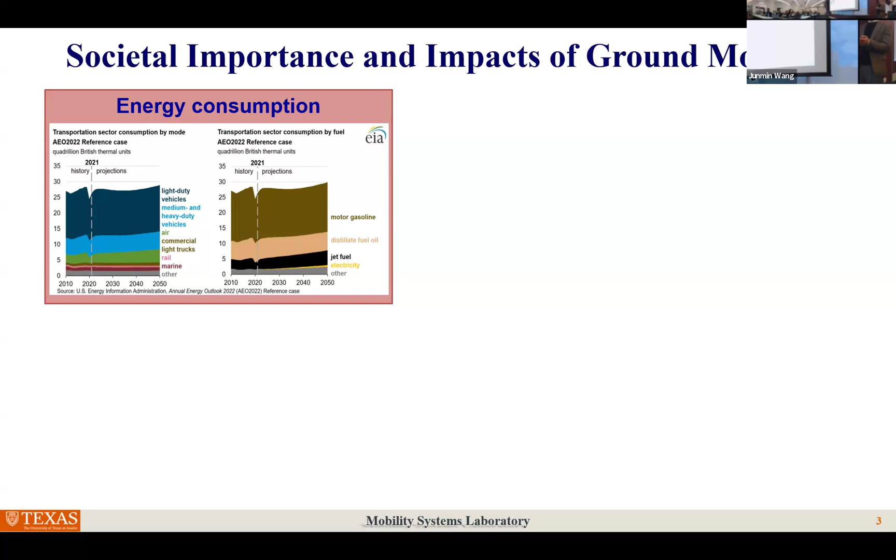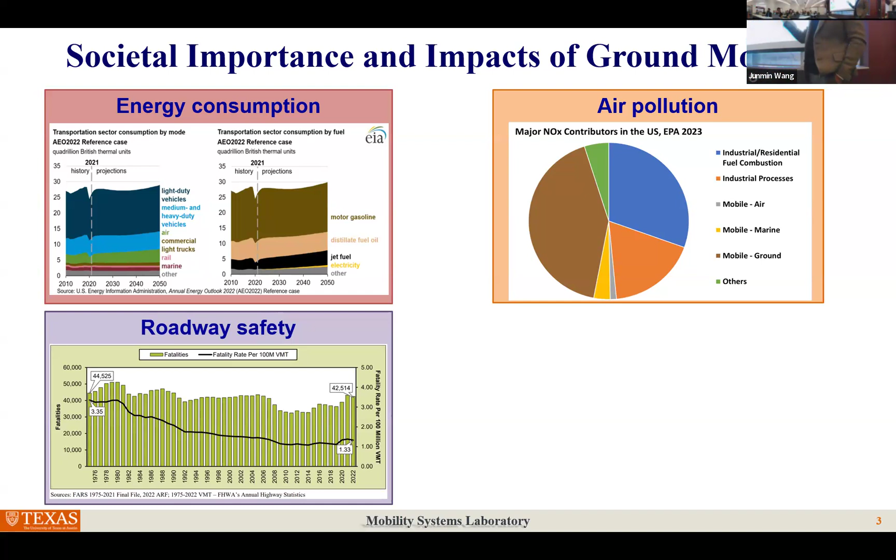But largely, the negative slope of this curve is due to technology advancements. So seat belt, ABS, airbag, EPS, AEB, or ADAS, the lane keeping system, all those are contributing to the decrease of this curve.

Looking into the future, we are in a smart age. So we have smart cities, smart living. People can do many things remotely. During the COVID years, we had remote learning, remote shopping, remote healthcare, etc. It seems like we could do everything online, everything remote. However, one thing we cannot do remotely is we need somebody and something to transport goods or people from point A to point B. That is our ground mobility.

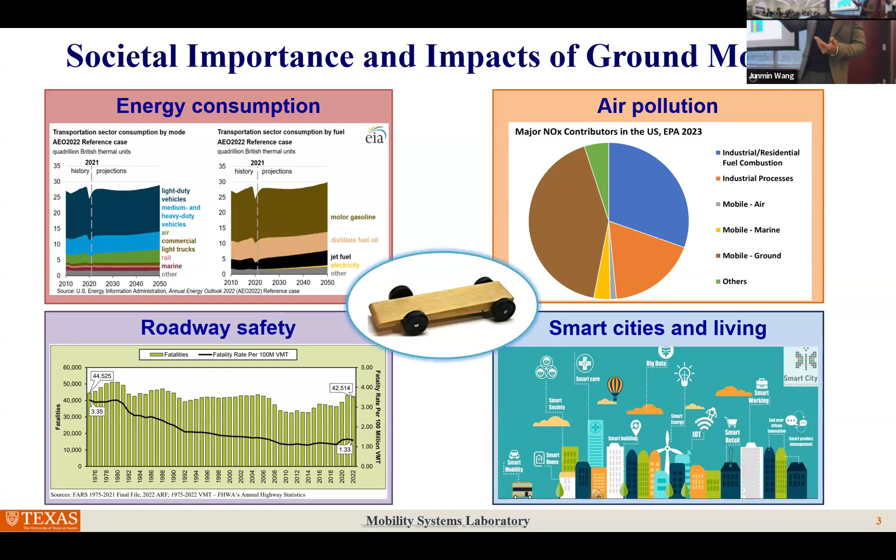So in these four important aspects of our society, ground mobility, ground vehicles play a very critical role. So I always say that any improvement here will have a very big impact on our society because the volume is very high. A 3% increase, 5% increase, multiplied by a huge number of vehicles, will have a very substantial impact on our society from the energy, environmental, and even safety perspective.

So the background here is the technology advance. One is the increasing level of automation. SAE has this roadmap to characterize vehicle automation into these 5 levels, or actually 6. Essentially level 0 is nothing being automated, everything is done by the human driver, all the way to level 5, meaning the human will be doing nothing, everything is done by the machine. In between them, we have different levels of automation.

Increasing level of automation. So right now on the market, perhaps we are somewhere here in the middle. Many of you, if you recently bought a car, probably have level 2. You have the lane keeping system and adaptive cruise control. Those two together are considered level 2 automation.

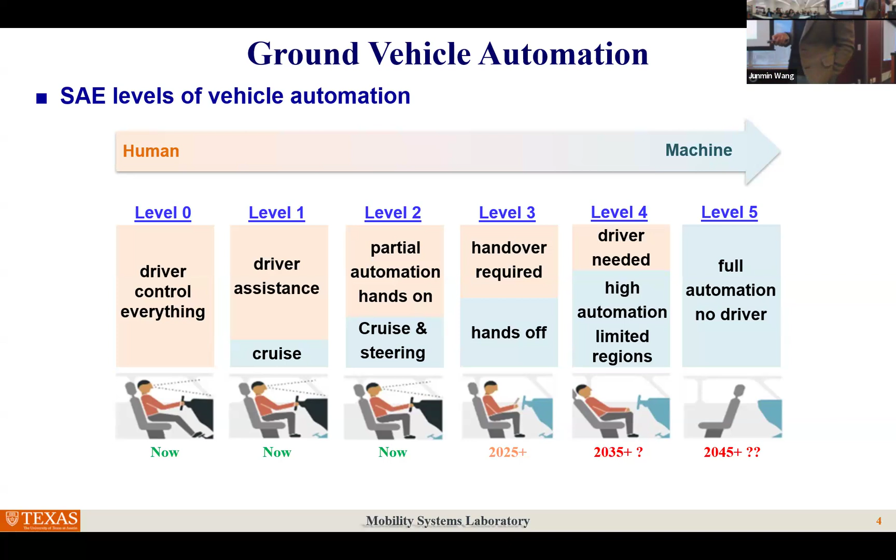Another is communication. With wireless technology being advanced so much, we can almost exchange information between the vehicle and almost everything else: to the human, to other vehicles, to the cloud, to infrastructure. So essentially, this brings us to a new era in which we have unprecedented information richness and new degrees of freedom due to automation.

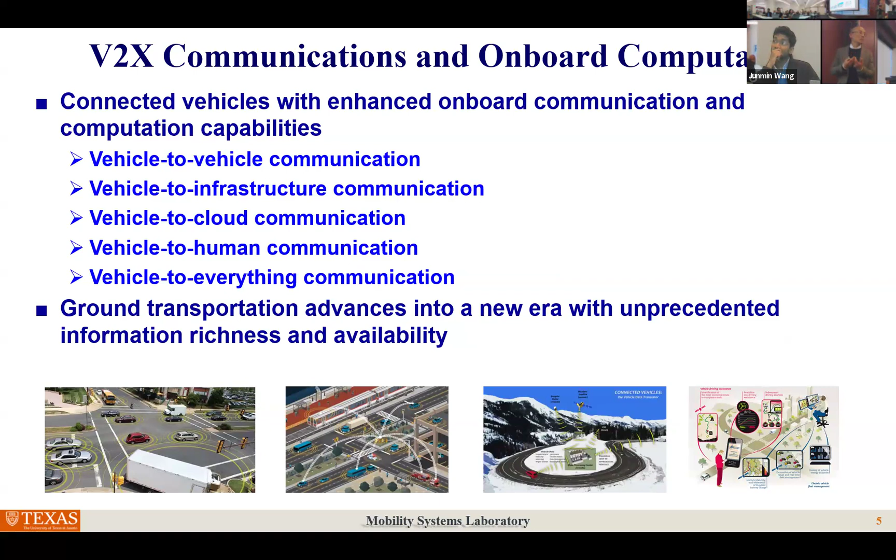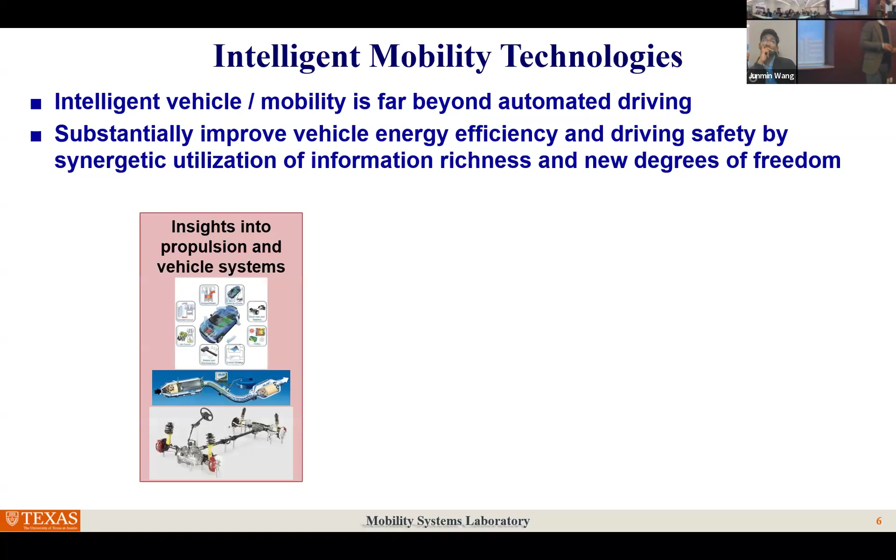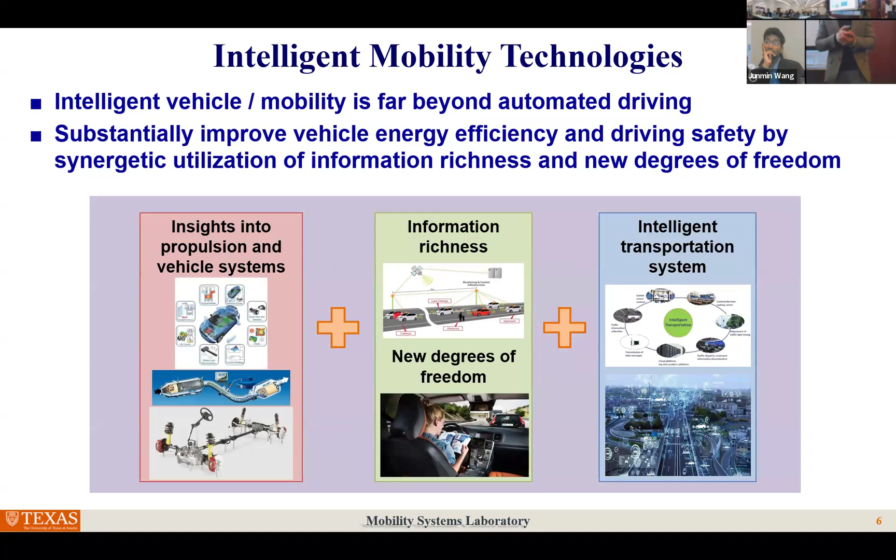So we are looking beyond just automated driving. What we are interested in is how we can substantially improve, for example, vehicle energy efficiency, driving safety, human trust, and human acceptance by leveraging that information richness and the automation functions. We want to leverage our deep understanding of these physical systems, plus the availability of information and the new degrees of freedom, and our infrastructure, to create synergies that can positively impact our society in terms of energy, living environment, and safety.

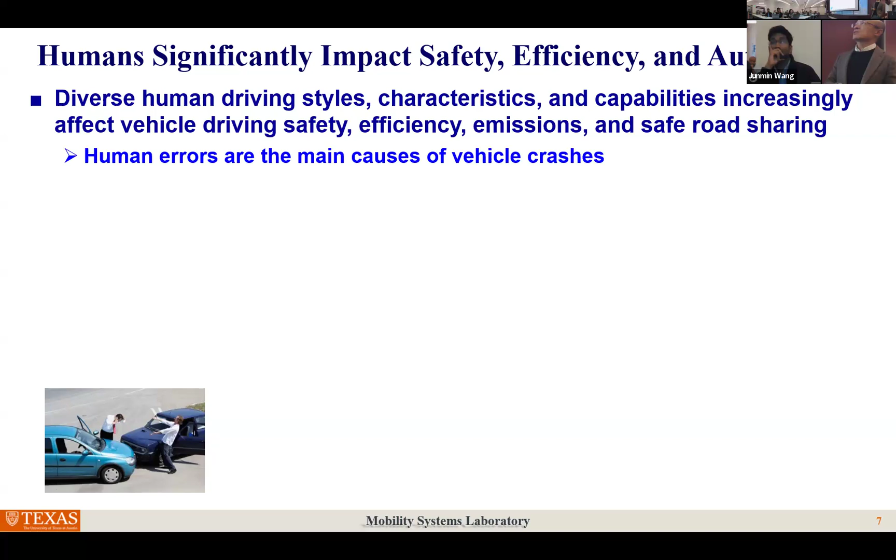In this background, even though we have increasing automation, humans are becoming more and more significant in terms of vehicle safety, efficiency, and automation, including human driver style variation, human characteristic changes, and human capability differences. For instance, more than 90% of crashes on the road are caused by human errors in modern society. Different human driving styles can cause up to 40% efficiency difference and up to 40% tailpipe emission differences. Everything else is the same; just change to a different driver, and we can have up to 40% variation, which is huge.

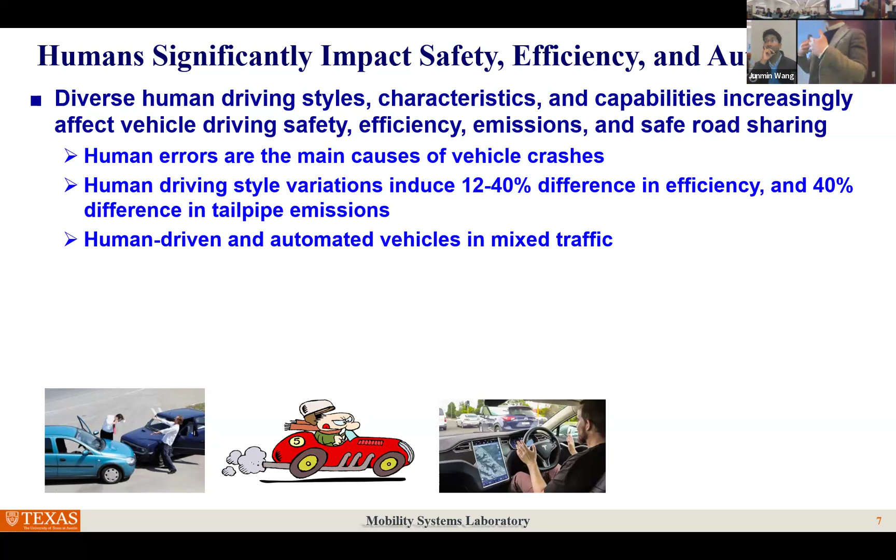And we already have human-driven and automated vehicles sharing the road together in mixed traffic. Another aspect is human trust in and acceptance of automation, which is becoming more and more critical to address. Looking into the future, perhaps we will not have driverless cars. We're going to have human drivers, machine drivers, or a combination: human/machine drivers.

In this context, there are several aspects. One is a survey conducted by the Institution of Insurance Companies several years ago. They surveyed 1,000 new cars bought by different customers. After using the cars for about three months or maybe half a year, you typically return your car to the dealer for its first service. They checked whether the automation functions were enabled or disabled at that first return. Guess the result? More than 50% of those functions were disabled purposely by their human users.

That means our engineers design all these fancy automation functions, but in reality, they are not that accepted by human users. When they are not using them, all these benefits we engineers designed amount to nothing, zero, no impact. That's one thing.

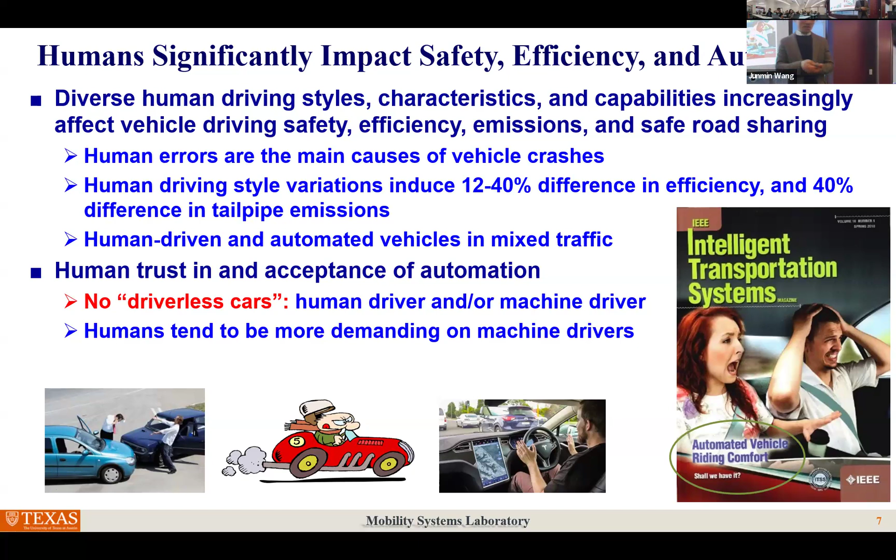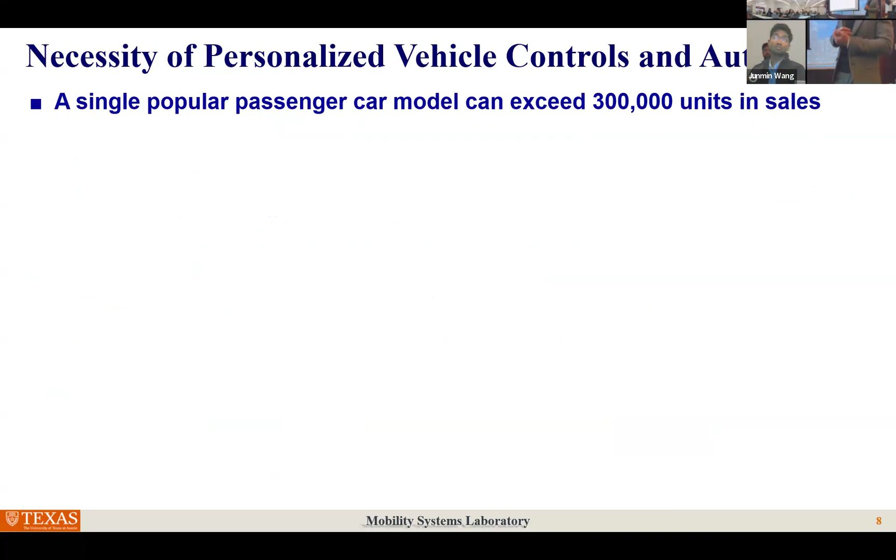So why is this necessary? If you look at data, a single popular passenger car, like some of the Toyota models, can reach 300,000 units in sales, which means we have over 300,000 different humans operating the same physical system all over the world, right? Different locations, different weather, different climate conditions, and different human habits. Obviously, this is a suboptimal combination.

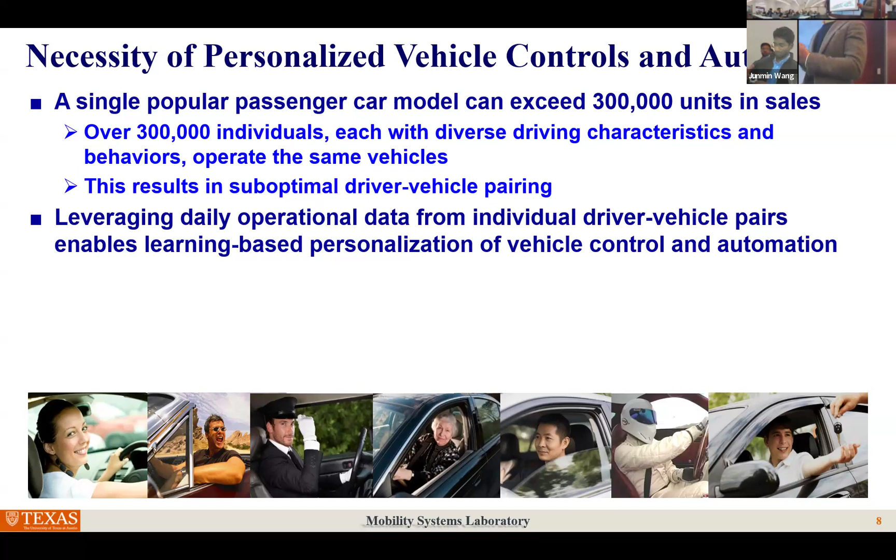So if we can leverage our daily operational data from these individual driver-vehicle pairs, learn from this usage, try to study the human user individually, and then do this personalization of the control, we might gain some benefits: benefits in terms of efficiency, safety, and also increasing the trust of human users in this automation. So those are all possible.

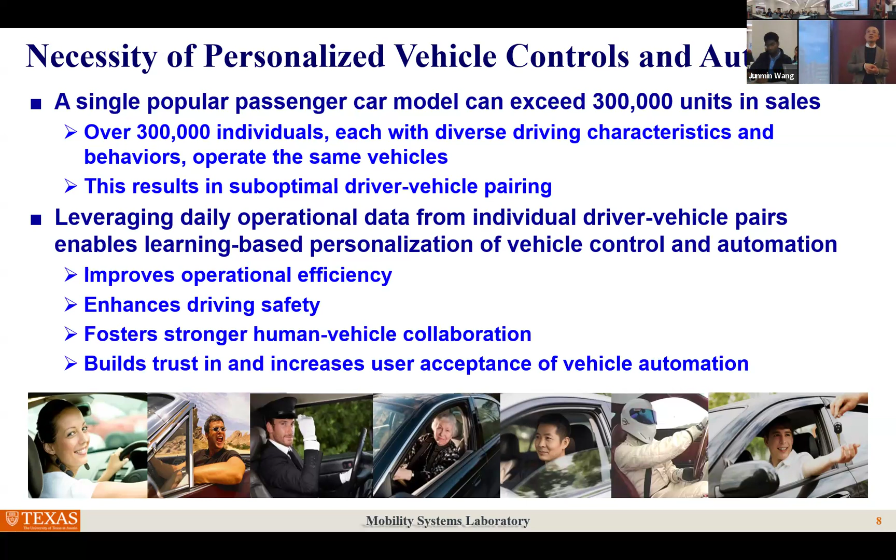However, we have to do this by learning from individual users. The OEMs like Toyota cannot do this because they don't know who is going to buy this car, where this car is going to be used and how it is being used. We can only do this during the usage: learning and then adapting.

So how do we do this? The central piece here is the modeling and prediction of individual humans. Using the historical daily data, we try to characterize the human's preferences, skills, characteristics, also emergency behavior, driving style, frequent routes, and all those things.

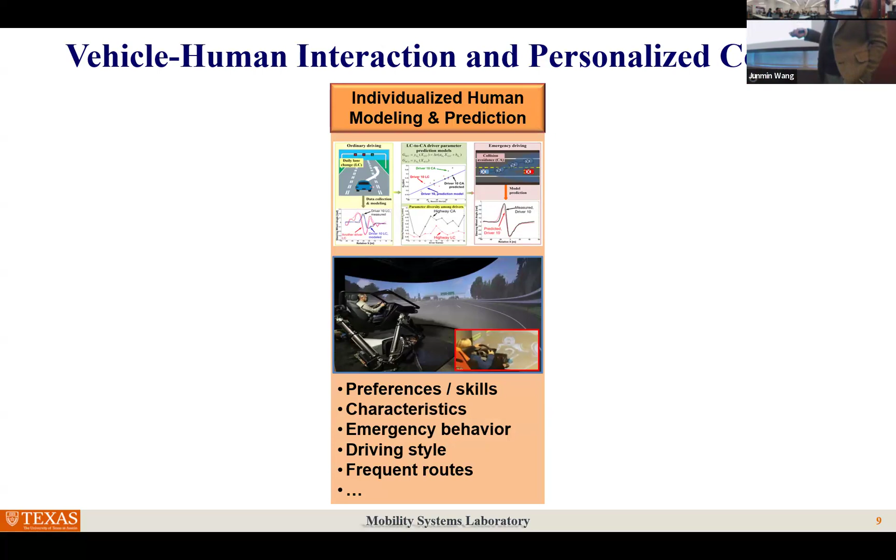On one side, we can leverage this knowledge to personalize, for example, motion control. How do we accelerate? How do we steer? How do we maneuver? To increase human trust and acceptance, thereby increasing driving safety. On another side, we could leverage this information to predict and enhance the optimal control of the propulsion system to increase energy efficiency and reduce tailpipe emissions, again creating synergy among these three pillars.

In recent years, my lab has invested a lot of resources to develop this integrated human-vehicle-automation simulation platform. The centerpiece is a real-time simulator. We have this very high-end immersive driving simulator where a human subject can be on the motion base, in a virtual reality environment. We can also simultaneously measure human brain activity, muscle activity, and cognitive activity like gaze motion and eye tracking.

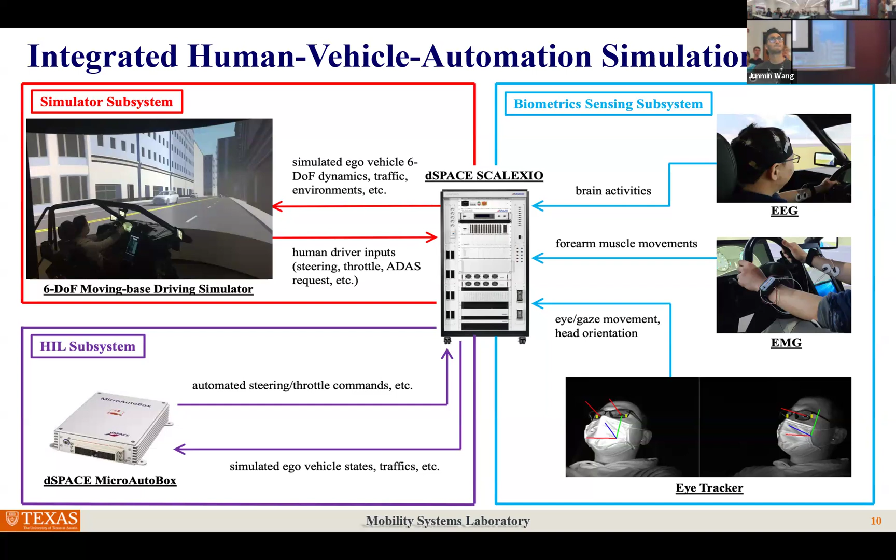We can also implement various controller algorithms. All of this can be integrated so we can learn, adapt, and evaluate. So this is a whole loop. I'll show you two more example videos. One is we can also simulate automated driving. In this case, we don't have a human driver. We can program it to automatically steer and deal with other traffic participants. For example, there is a stop sign coming here. It will recognize the stop, then make a left turn.

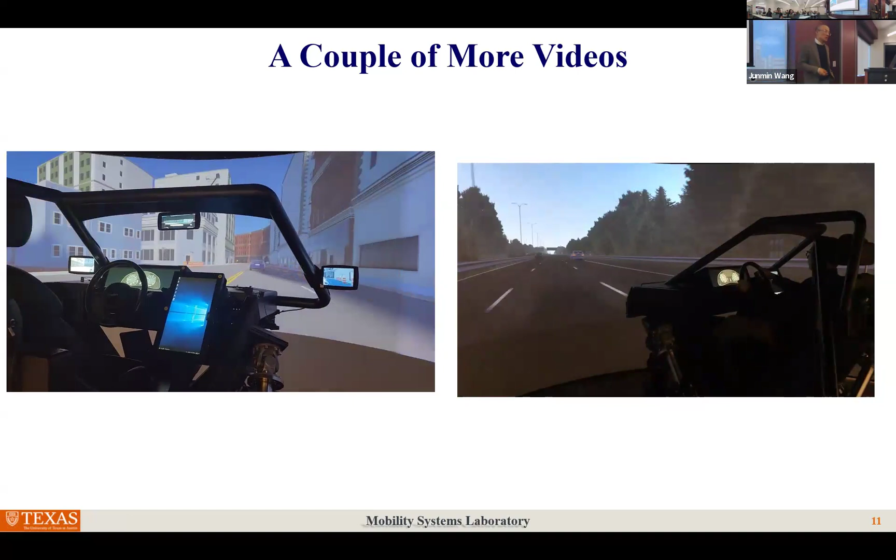We can also simulate different weather conditions. I don't know if people on Zoom can see this, but you can closely see the raindrops. We can simulate raindrops and other vehicles, which makes it a really powerful system to put the human into a movie-theater-like setup that is very immersive to study human and automation.

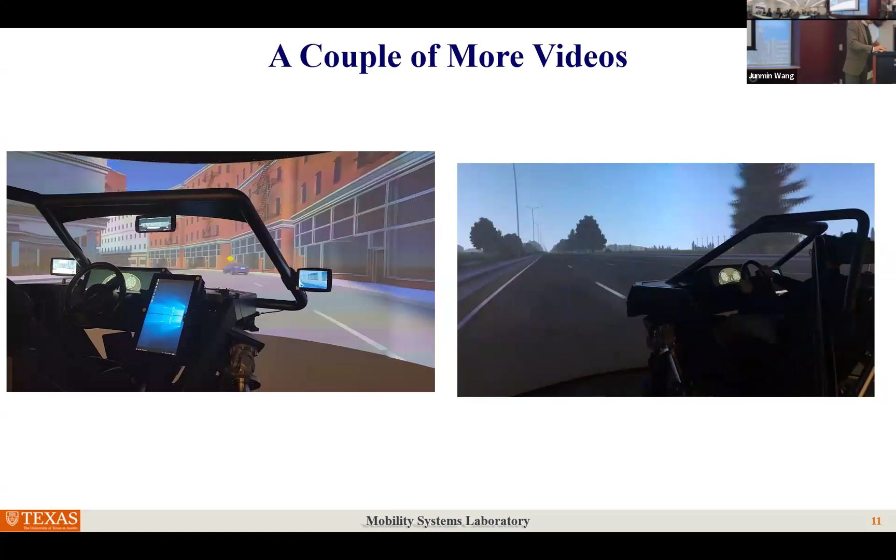Okay, now let's get into several examples. First is how we do personalized propulsion control. One example is a hybrid electric propulsion system. It has an internal combustion engine, and in parallel, an electric drive with motor and battery. Together, we want to minimize energy consumption and also minimize tailpipe emissions.

Optimal control. So with connectivity and camera, LiDAR, and radar sensors, we can have future traffic and road information available from those perception systems. Even though the system is stochastic, we can still detect them. However, between this traffic and road information and the future reference signals of the propulsion system, which are the future torque and speed demand, there is an uncertain element, which is the human driver.

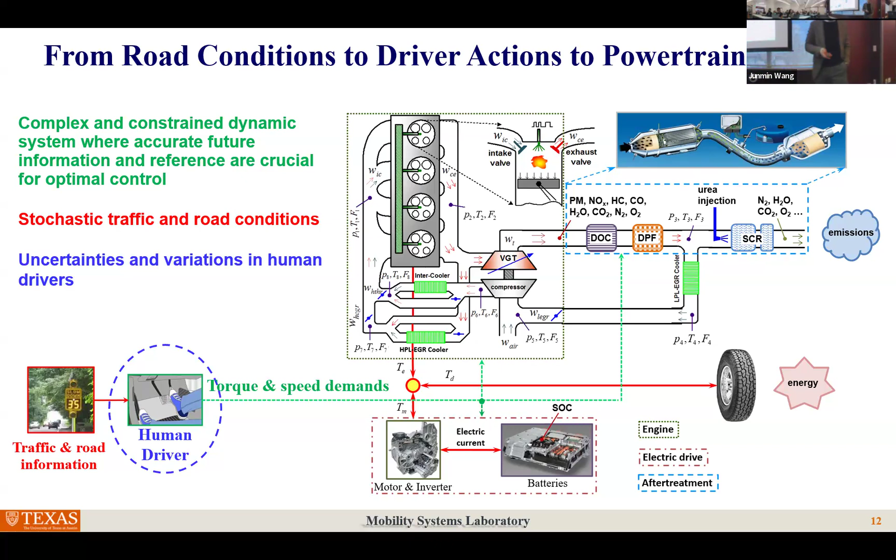Everything else is the same road, same traffic, but different humans will translate this information to different torque speed demands. And this piece is very uncertain. Unless we can have a good way to deal with this uncertainty, it's very hard to achieve optimal control in real world operation. So how do we address this?

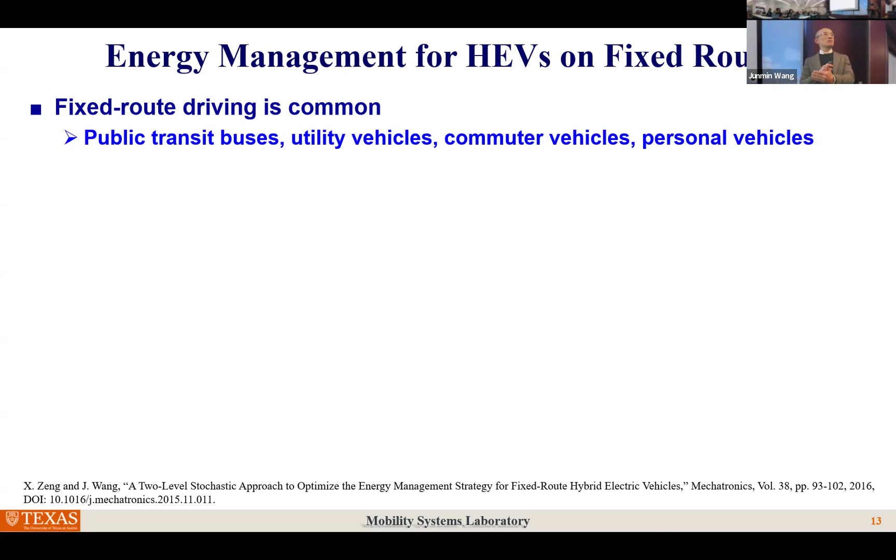Let's first look at this example. Essentially, this is a HEV energy management system on fixed route driving. So what is fixed route? Fixed route driving is actually very common. For example, our public buses, utility vehicles like garbage collection trucks, commuter vehicles, even our personal cars often drive on a fixed route. If you think about driving from your apartment or home to school, most of the time it goes through the same route. That's called a fixed route.

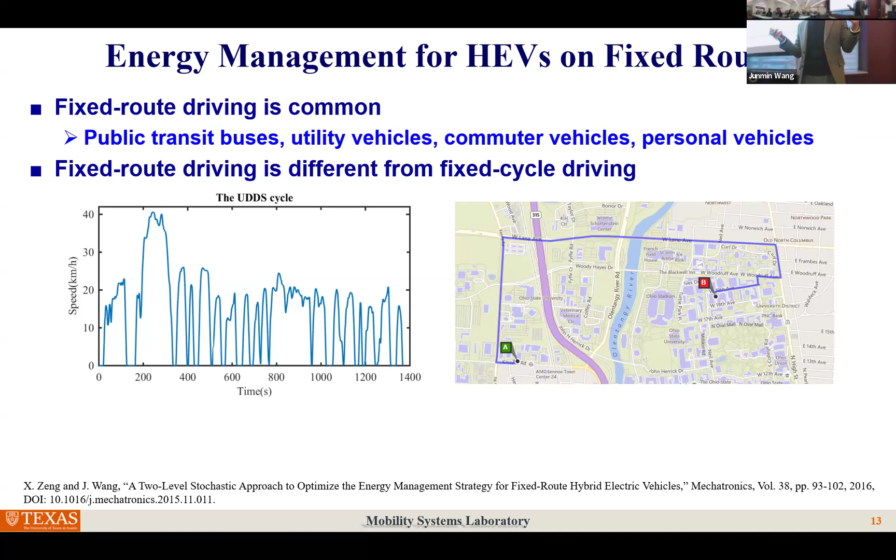So even though the route is fixed, it is different from the so-called fixed cycle driving. Fixed cycle means the vehicle speed is a predefined function of time, used for standard testing of vehicle efficiency, emissions, etc. Fixed route means you start from point A to point B, going through the same route, but every trip is different because every trip has different traffic, different weather, different vehicle condition, or different human mood. So this is completely a stochastic process, even though the route is fixed.

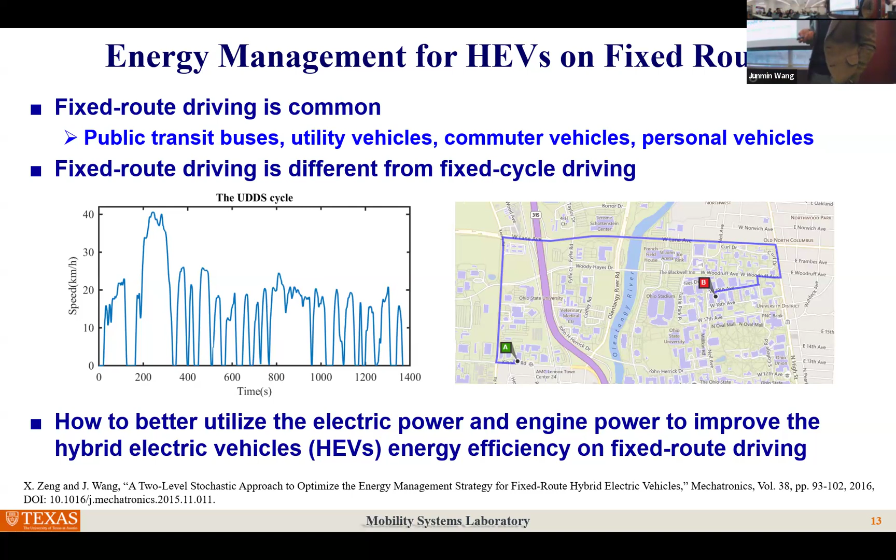So that's the nature of it. So how can we better utilize the electric power and engine power to improve the energy efficiency of this HEV on fixed route driving? That's a problem we addressed several years ago.

So we started with a typical fixed route, like a 12-kilometer route, which had 8 kilometers of local driving, 3.5 kilometers of highway, some uphill, some downhills, left turns, right turns, stop signs, and also traffic lights. Graphically, something like this. It's a little bit representative of a typical home-to-work kind of route.

So we did 24 trips with a human driver. And if we look at the overall average of these 24 trips, we found the average travel time is about less than 14 minutes. Average speed on local roads is 15, average speed on highway was 96. And the average number of stops was 14.7 because we have traffic lights—sometimes green, sometimes red. So if we only look at average data, it doesn't tell us much information.

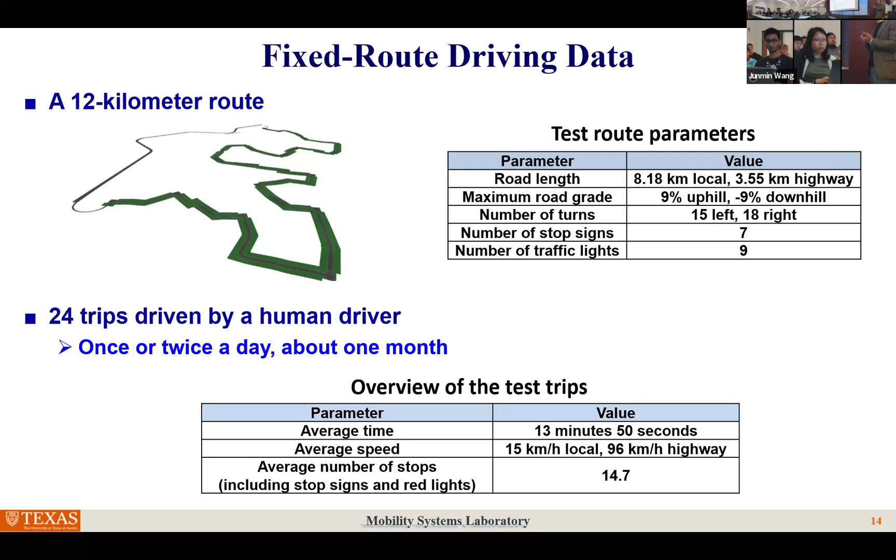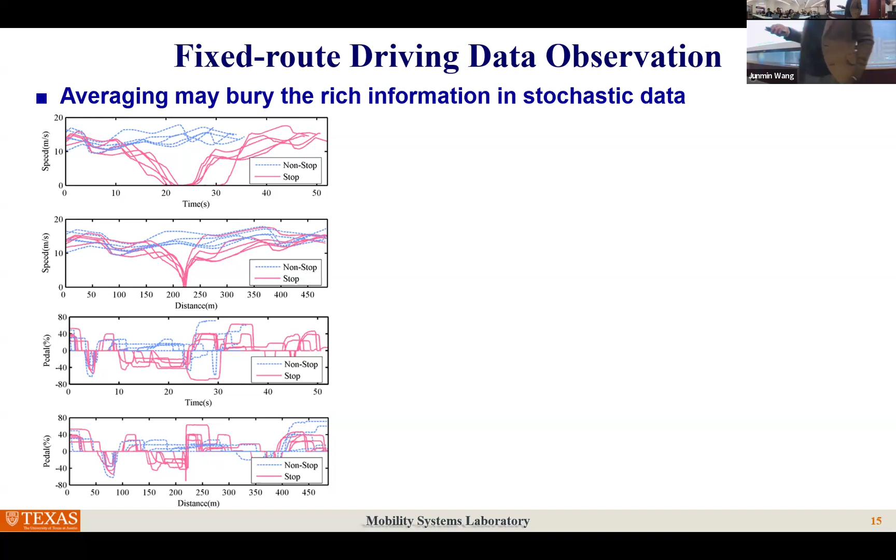But the duration of stopping is different—time to time, it depends on which phase of the traffic light you get. Here is the pedal position, shown for the stop in both the time domain and the distance domain. One thing here we noted was inspiring: when we put the data in the time domain, it was less informative. When we put the data in the distance domain, it was a little bit more informative. So that was kind of inspiring.

Then we also compared these two groups, the stopping and non-stopping group. We found a very different kind of data set in the regenerative braking energy. Because this is an HEV, it has an electric motor—when you brake, the motor can switch to a generator, converting kinetic energy back to electricity. So we can obviously see this stopping group had much higher regenerative braking energy being generated or captured compared with the blue group.

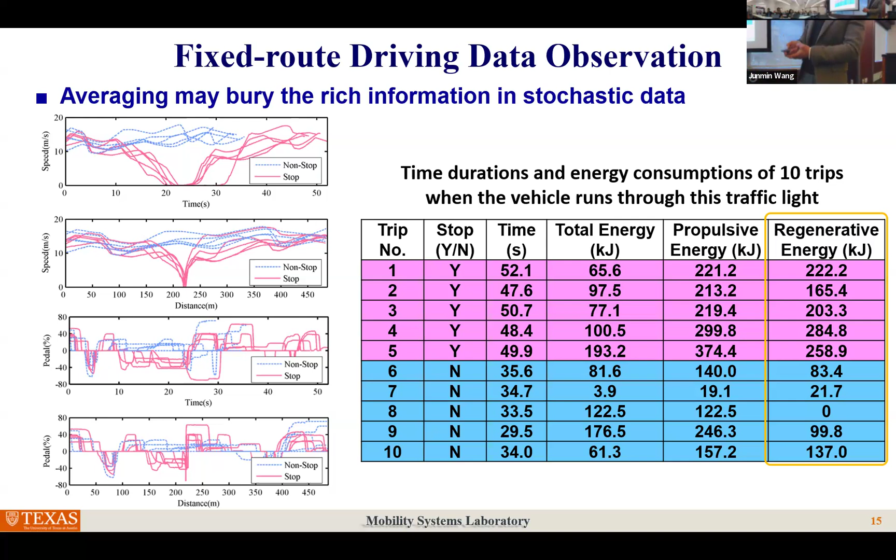So that is kind of inspiring, saying, okay, this might be something useful that we could leverage to increase the operational energy efficiency. So we use that inspiration.

We divided this fixed route into smaller segments by using deterministic road and traffic features. We know where the traffic light was located, but meanwhile we also know the location of stop signs, sharp turns, uphill sections, and speed limit changes. Even though this entire trip is stochastic, along it we have some deterministic information. If we use those, we might be able to improve our speed and power prediction and increase the efficiency of learning from the driving data, and ultimately help us predict the human's behavior. Then subsequently, we can do a better job in terms of energy management.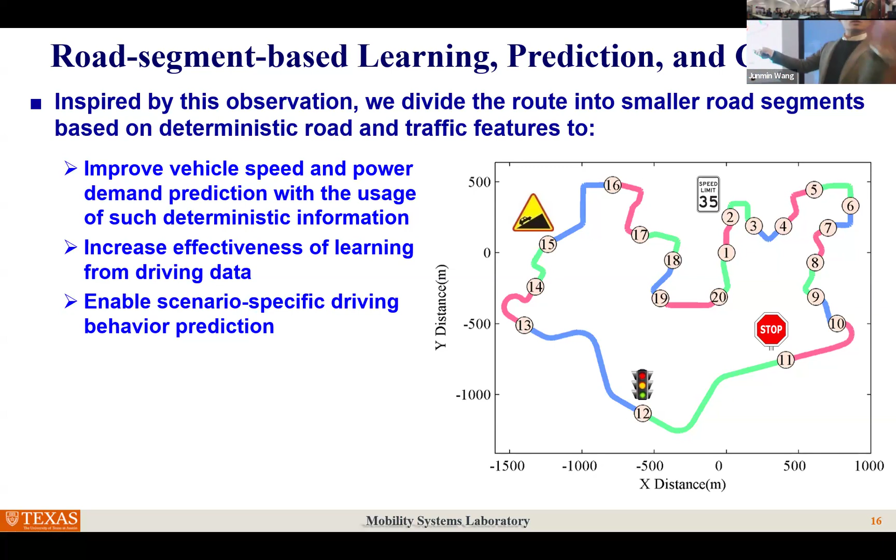So that's what we did. We essentially use these deterministic features to divide one given route into smaller segments. Then within each of these segments, we do the learning and do the optimization. This is helpful - for example, this is stop sign number 11. Depending on direction of travel, if we're going this way, we know the vehicle speed most likely going to be 0 around this location, which is very helpful for the prediction. Same here - we know this is going to be a sharp turn, and the vehicle most likely will reduce its speed, otherwise it will get out of the track.

So essentially, we separate this energy management system into two portions. One is offline learning and optimization, and the second is online real-time implementation. I'm going to explain a little bit on both sides. Using the historical data, we can collect every trip, put them in the cloud, then do this offline optimization, producing the learning-based optimization result to inform the online controller how to do power management when we come to each of these road segments.

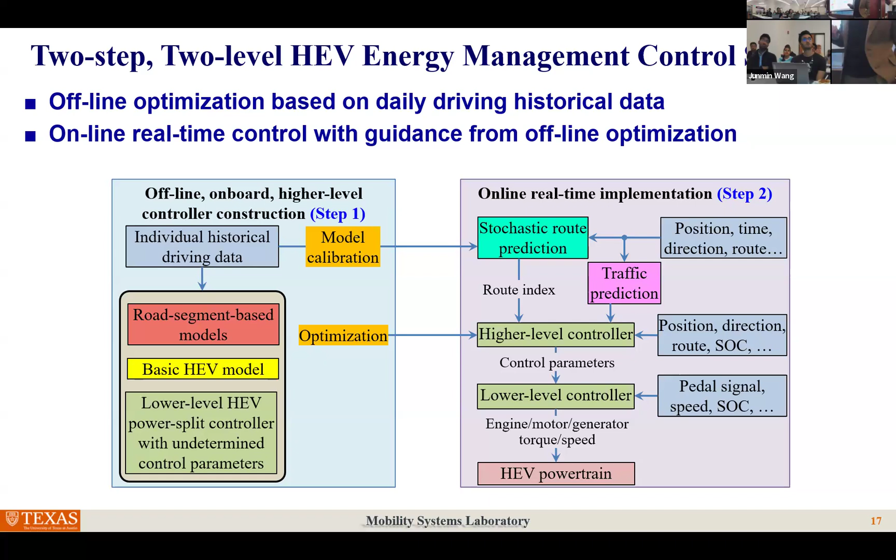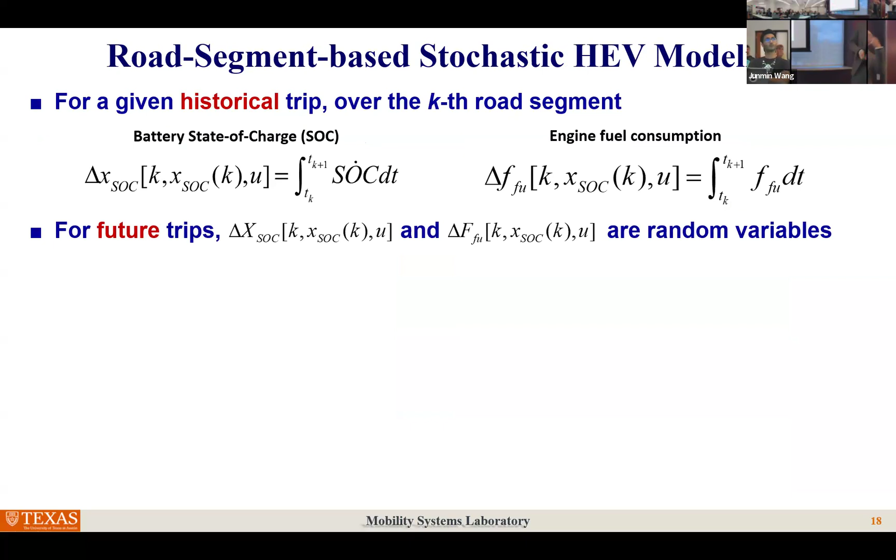So we created this road segment-based stochastic model. Essentially, for any road segment from the previous historical trip, we consider two variables: the battery state of charge change and the engine fuel consumption. For all future trips, we consider these two as random variables. As we accumulate sufficient trips on this fixed route by this vehicle and this driver, we can create their occurrence frequency, then come up with a probability distribution of these two variables. Then we can have the stochastic model in terms of energy consumption.

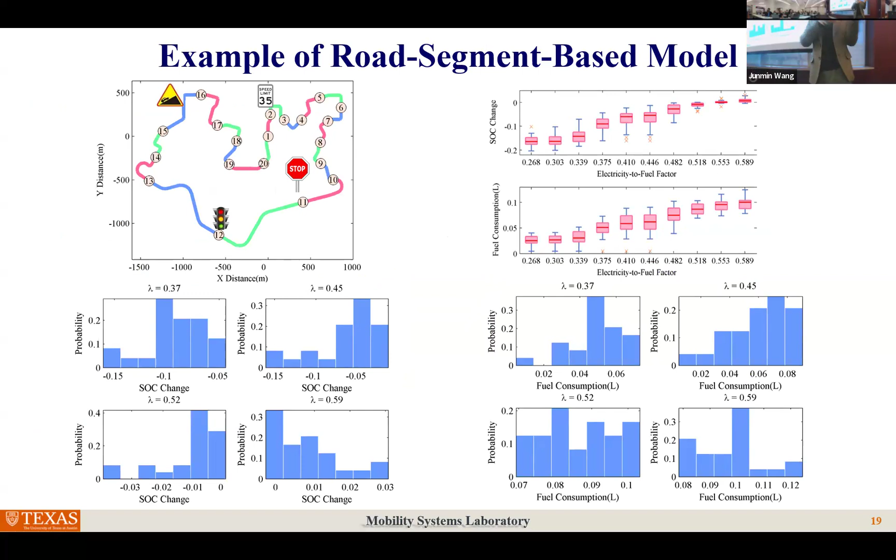All this can be done offline. So this is an example - some of the energy consumption characteristics with different lambda. Lambda here is the control parameter, deciding the variable between 0 and 1. It decides how much we should use the engine versus how much we should use the electric drive. So essentially it's a power split ratio.

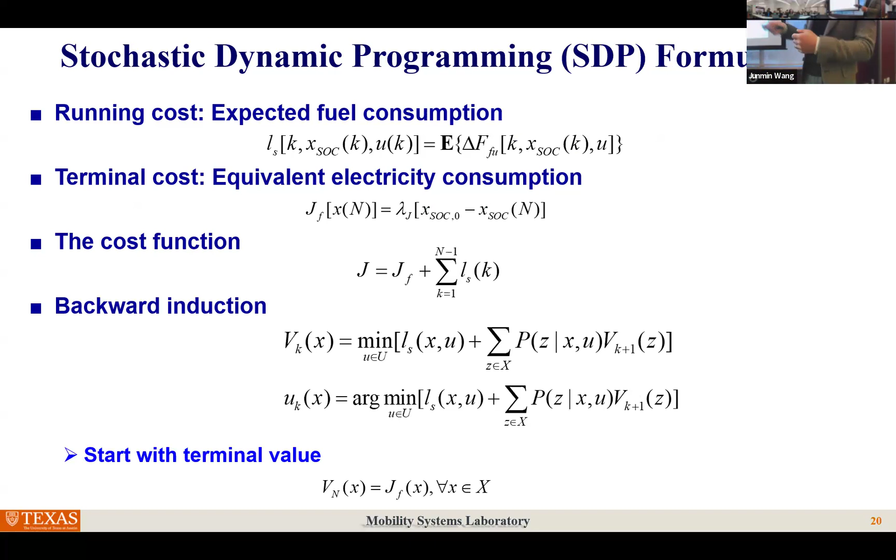So we use stochastic dynamic programming offline - running cost, terminal cost, then we do the backward induction, and we can come up with this optimal control policy. At the end, this offline learning and optimization result can be summarized as a three-dimensional map.

So this three-dimensional map, as exemplified here on this plot, has two inputs. One is the segment index - which road segment we are about to enter. The second input is, at this moment, what is the state of charge of the battery. From these two, we come up with the output, which is lambda, the power split ratio for the HEV to use.

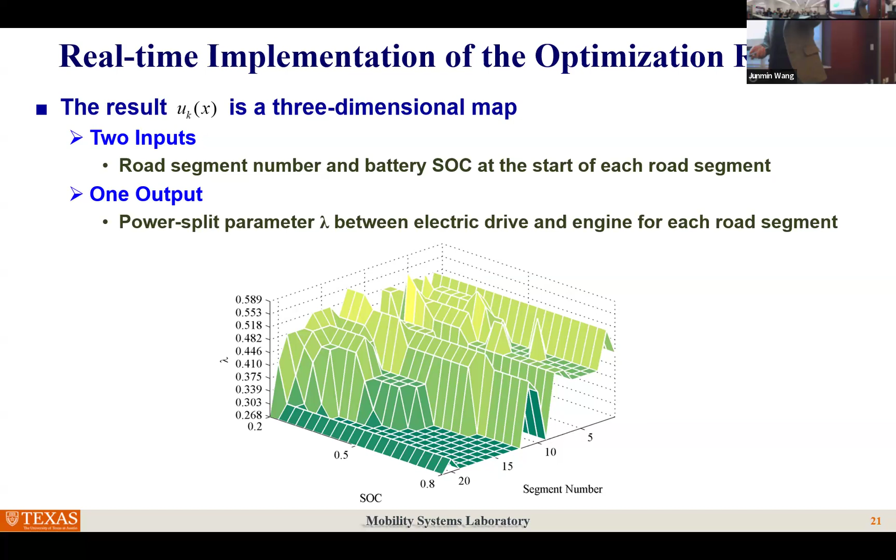So you can see, even though the learning and optimization is pretty lengthy, the end result can be summarized as a three-dimensional table or map stored in the memory of the car - memory is nothing, it's onboard. Then we can use it in real time - no computation, just table lookup.

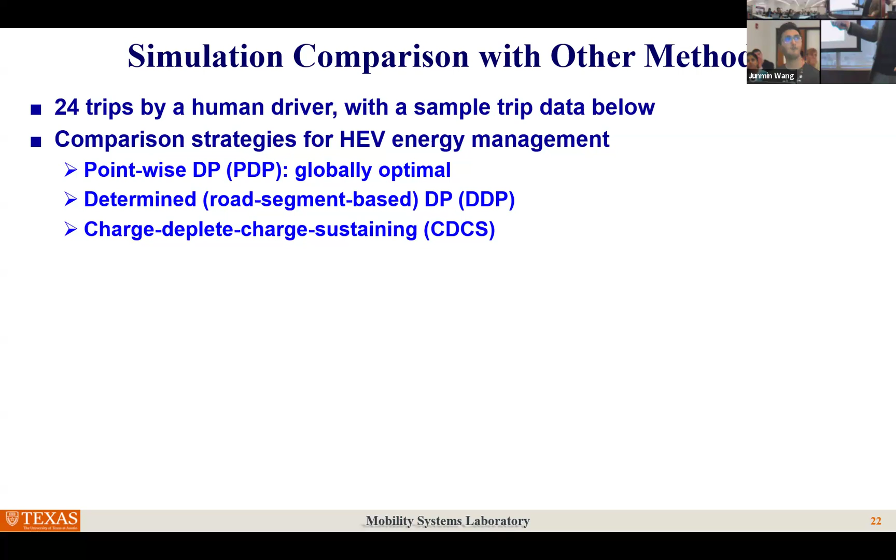So we compared this with three other methods. One is point-wise DP - that means we do this backward induction calculation after we finish, every meter going back to see what would be the best possibility. Obviously this is not causal, this cannot be implemented, but it's a benchmark. The second approach is segment-based DP - that means we don't do point-wise, but segment-wise. The third is this rule-based charge-depleting, charge-sustaining strategy.

Compared with CDCS, which is a real-time implementable EMS, energy management strategy, we can reduce energy consumption by 7%. No hardware change, just software. And as we mentioned at the beginning, this 7% energy consumption reduction is huge.

Because it's a stochastic process, we cannot guarantee every trip gives you 7%, but over a month or two, the average expected value is about 7%, without affecting any driver's preference, their demands for speed, or their pleasure of driving.

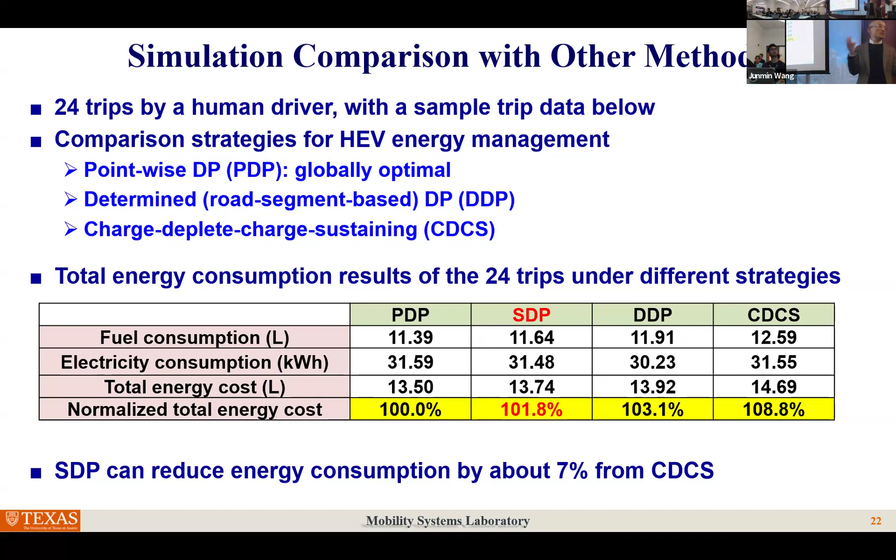So this is good. All right, let's switch gear. On the safety side, this is another aspect we found: humans all have different control characteristics in terms of steering.

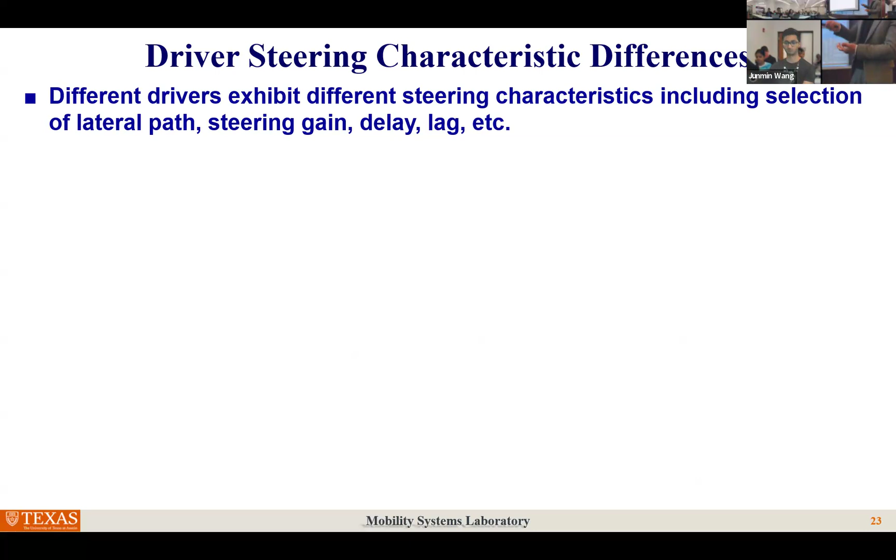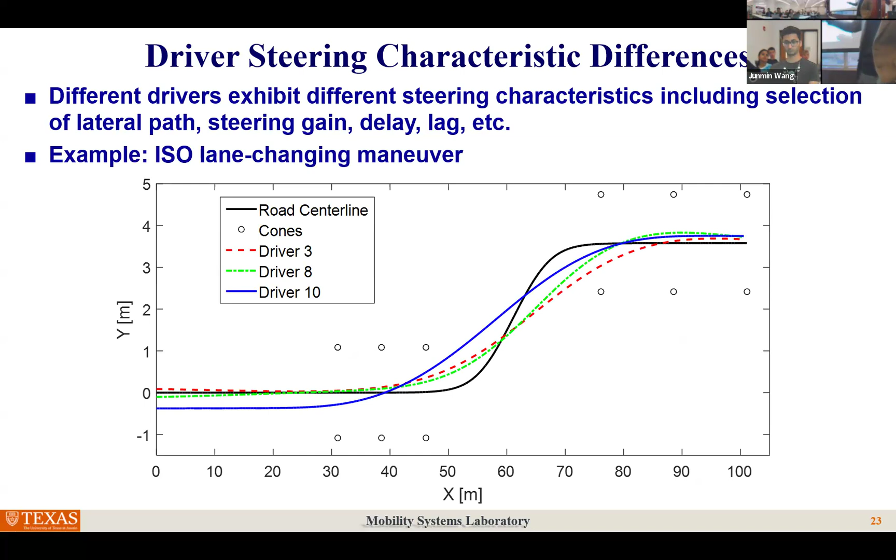For example, we asked three human subjects, labeled driver 3, driver 8, and driver 10, to do a standard lane changing maneuver. We found all three humans exhibited differences in their path, in the way of doing the lane changing maneuver. That is very obvious.

So then we thought: can we come up with a model simple enough, but capable of capturing those differences in human steering behavior, human steering characteristics? We also want to keep the model analytical, not a machine learning model, because we envision using it next in our active steering control, our assistive control.

So we had about 7 or 8 parameters. Once we have this model, all we need to do is record the historical data of a driver making a lot of steerings and lane changes, then do offline calibration of the model parameters. So we can come up with a set of parameters for that particular driver, and the model can very well match the human's steering action.

We show you here driver 5 and driver 8 doing a lane change maneuver at a very high speed, 75 mph. You can see the comparison between the model predicted signal and the actually measured signal of the steering angles.

They match pretty well. Driver 3 and driver 8 do a double lane changing maneuver on the highway at 55 mph, meaning you switch lane then switch back—a kind of collision avoidance maneuver. We also found the model can very reasonably, very well match individual humans.

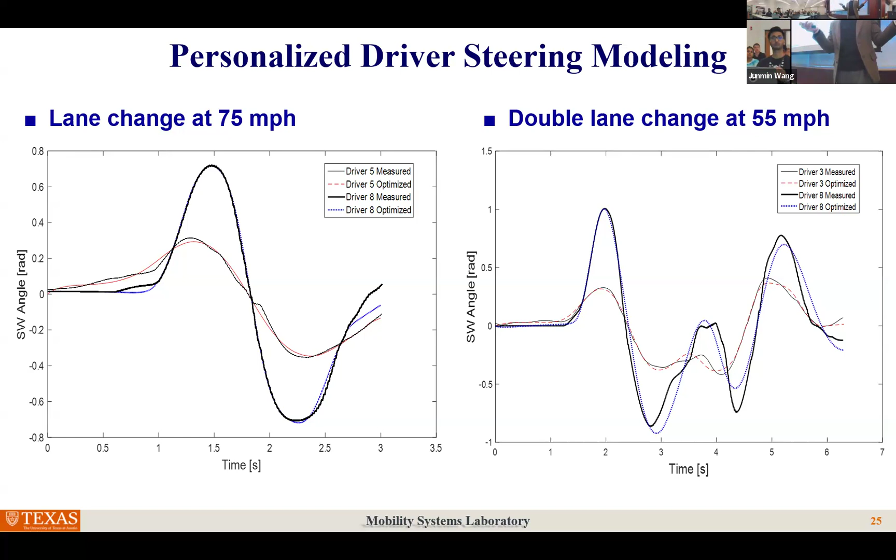But you may say, this is nothing—okay, you have a model, you have data, you run optimization, you get a good set of parameters. That's what you do every day, right?

So what's the meaning? The actual power of this work, done in another paper, is prediction from ordinary maneuver to collision avoidance maneuver. In this shared human-machine driving, the driver model must predict an individual's steering signal, the steering command, in a collision avoidance situation.

Because the human's steering command may or may not be successful in avoiding collision, if the model can predict that behavior, then the controller working in parallel with the human can be better informed about what my human is doing, and compensate accordingly—in a tailored, personalized way—to team up together and make it successful.

However, these things need to be used during collision avoidance maneuvers, but we don't have collision avoidance data, because collision avoidance doesn't occur frequently. Maybe all of you are very good drivers and never had a collision avoidance situation. For me, I'm a bad driver—occasionally I have one or two times a year. That's about it. We don't have data to learn that.

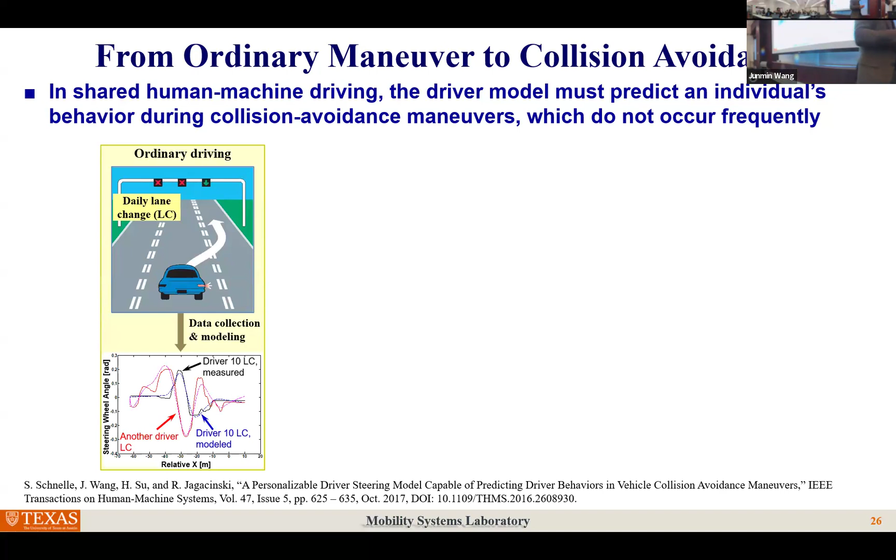So that's a challenge. What we did was, interestingly enough, if we dig into these ordinary steering maneuvers deeply enough, we found a way to correlate the characteristics of the ordinary steering maneuvers we do every day to predict the individual human's steering model parameters when that human will be doing emergency collision avoidance handling or maneuver.

By using these predicted parameter values, we can predict his or her steering signals reasonably accurately, which can enable our controller to do proactive control.

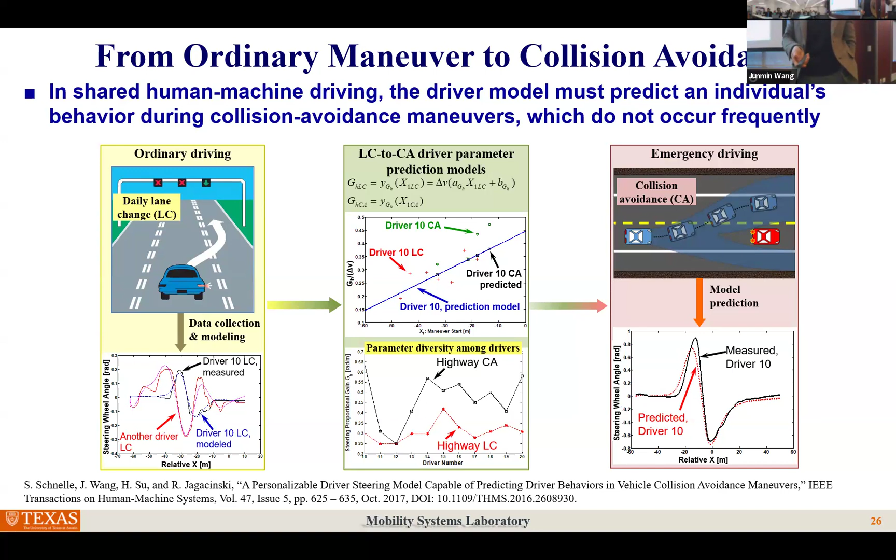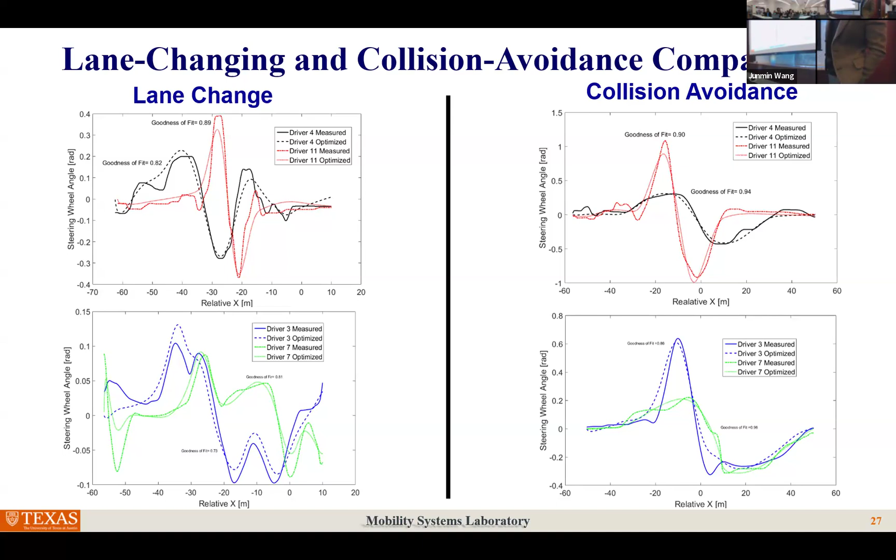They are different behavior. In parallel, in the collision avoidance, you can see the same drivers, like number 4, which is black here. You can see the black curve here is very different. Number 11, red, is very different. Bottom is the same, right? Blue to blue, green to green, are very different. That means for the same human, ordinary steering versus collision avoidance, their steering behavior is dramatically different. That's why we have to predict. We cannot use the same parameter for the ordinary maneuver as for emergency handling.

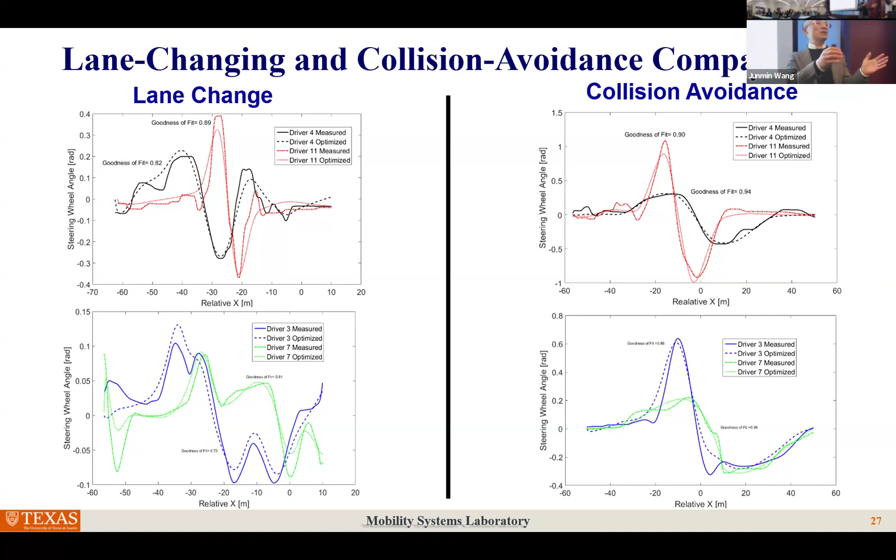This plot is more interesting. We summarize all 20 human subjects we studied, different age, different gender, different years of driving experience. This one shows you just 4 of the 8 parameters. For example, this is G sub H, that's the steering gain. T sub H, that's a delay term. L is the prediction distance. K sub FF, that's the feed-forward gain.

Across these 20 human subjects, we show two colors, two bars. One is gray, that's the highway lane changing maneuver, the ordinary maneuver. Black is highway collision avoidance, the emergency maneuver. You can see, for example for GH, for the same human driver, black and gray bars are very different. Some humans have similar values, for example number 12, black and gray are almost the same. But also the parameters across these 20 subjects are variable, they are different.

However, universally there is this one, KFF. You can see for everybody we tested, their black bar value is much, much higher than the gray bar value. So what does this mean? This means when we're doing this ordinary lane changing maneuver, we do not use feed-forward, because our feed-forward gain, which is gray, is a very small value. That means when doing an ordinary lane change maneuver...

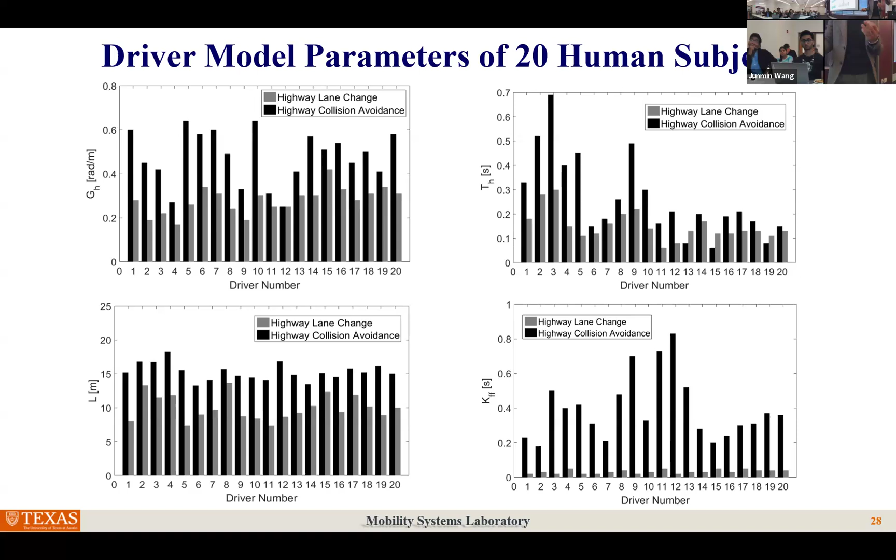Some may not. So we have this model. Now, the next step is how do we use it. We can do this driver-centric automatic steering control.

There are two categories in doing this. One is called automation-centric methodology. That means the controller controls the vehicle motion based on this road vehicle dynamic model, and they treat the human driver's input as a disturbance. You can do robust control, disturbance rejection, and motion control.

Another category of approach is driver-centric. That means we can provide control action from an integrated model, including driver, road, and vehicle altogether. Therefore we can offer this collaborative action, by taking the human driver into consideration in a personalized way. So that's what we call driver-centric.

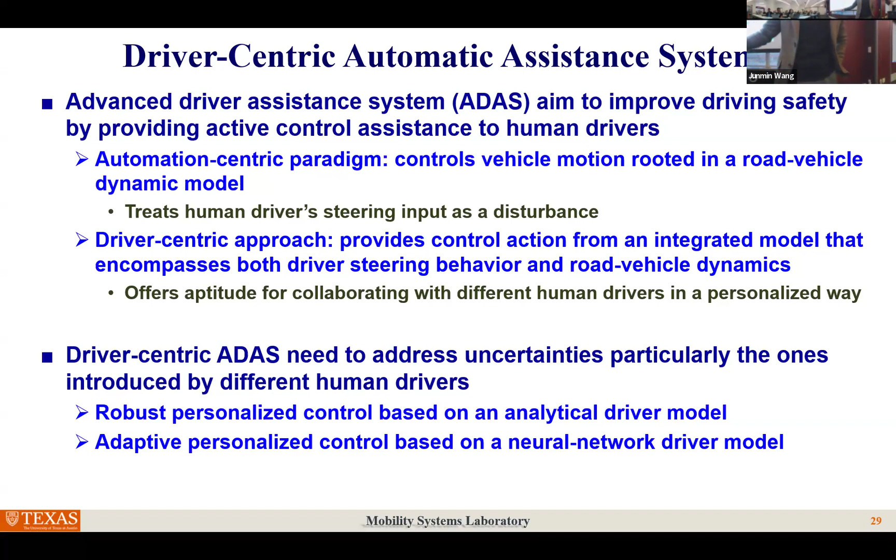In this aspect we conducted two different treatments. One is using our robust control, robust personalized control based on the analytical driver model, like the one we just showed. The second approach, if I have time, is this adaptive personalized control based on a neural network driver steering model. The first one is pretty more straightforward. Essentially what we did was augment the model to incorporate this driver steering model we learned, the analytical model, with the parameters being learned from historical data as part of our system matrix.

Then we can do an H infinity controller, gain scheduling, etc. I want to show you two humans. One is called A2, which is blue, an inexperienced driver. Second is B2, which is red, an experienced driver. From their historical data, we learned their driver parameters as listed here in the table. You can see the values are different. Some values are the same, but this one is very different, because their skill levels are different.

So we asked them to do this double lane change maneuver, like collision avoidance. Here is an obstacle, but here is also another upcoming obstacle. You have to steer to the left and come back. It's a very challenging maneuver.

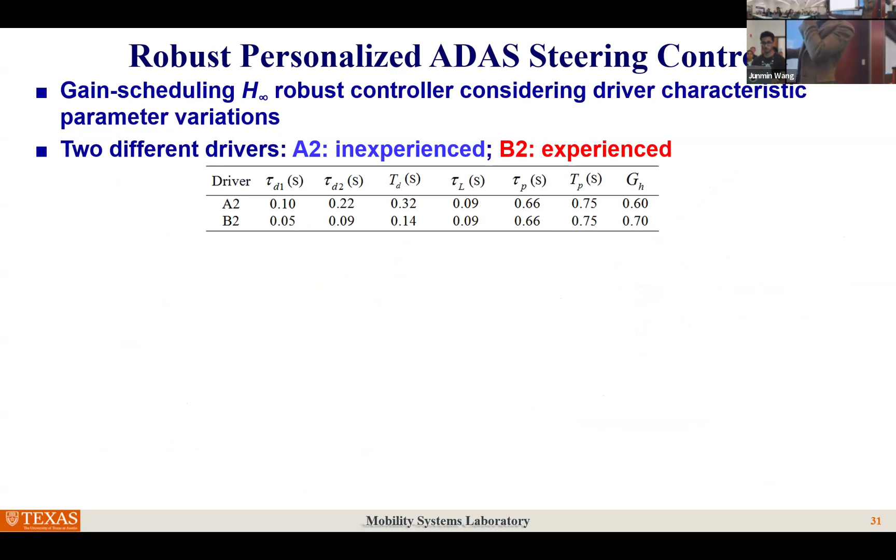Next, I want to cover this one. That's one thing, but the question here was: we rely on this assumption that we have this analytical model of the driver steering behavior learned from the data. However, you might say this learned model may have uncertainties, or they may not sufficiently capture the human's steering behavior, or the same human's steering behavior may change day to day. Those are all reasonable arguments, I'm not denying any of them.

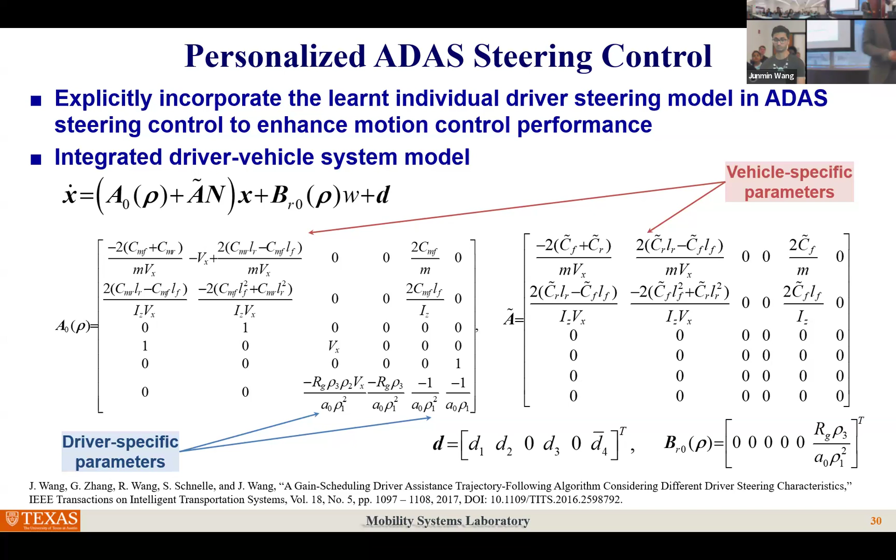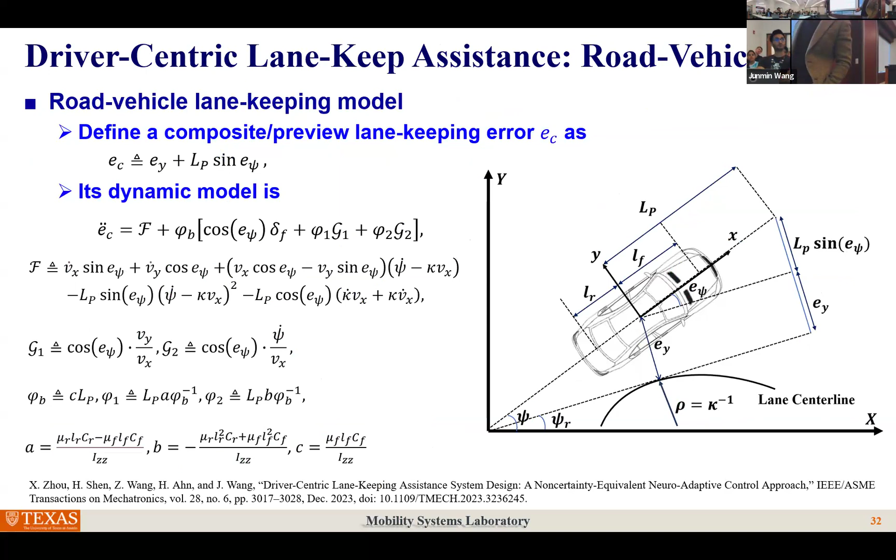So that's why we started another approach, following the neural network to see whether we can help. This one is again using this road vehicle model, so I can skip these details. The key thing is instead of using an analytical model, let's use a neural network, and use this neural network to mimic and learn the human's driving steering behavior. You can see after learning from data, training this neural network, we were able to reasonably mimic the human driving steering behavior from the steering command.

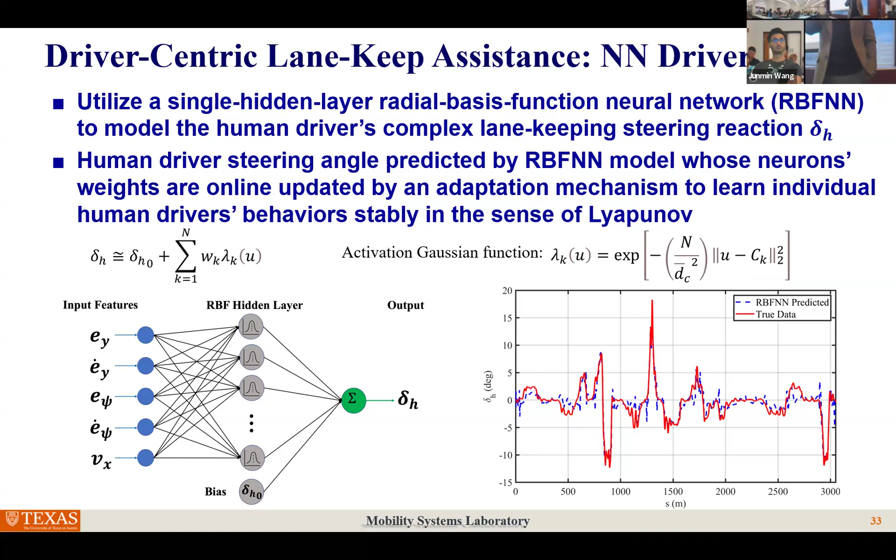The question here is: you have a neural network-based model for steering, you have data, you train the model, you calibrate the parameters, you calculate the performance - that's everybody's doing right now. But how do we put this in a controller? How do we take that neural network trained model into our controller, an analytical controller with guaranteed performance and guaranteed stability properties? That's what we want.

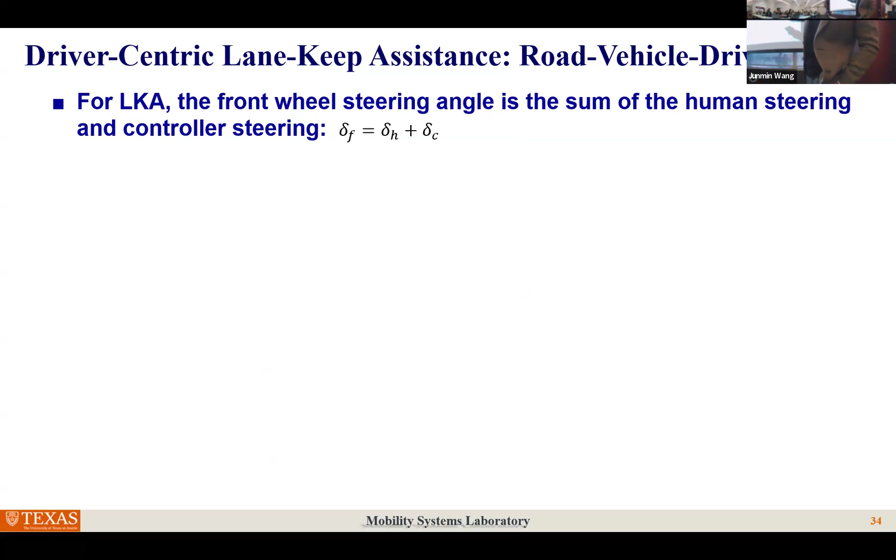So here, now we consider this shared control, with human steering and controller steering added together to become our front wheel steering. In this, we combine the road vehicle model and the neural network driver model together as a larger model, and consider this E sub C, which is a combined error term in the lateral displacement mode.

In this, we have uncertainty in the driver model, the neural network model, and the uncertainty comes from the neural network model parameters, the theta vector, and that has uncertainties. For different humans, theta is going to change for sure. Even the same human: today you are in a hurry, tomorrow you are in a relaxed mode, your theta may be different, day to day. So that is the uncertainty we want to address.

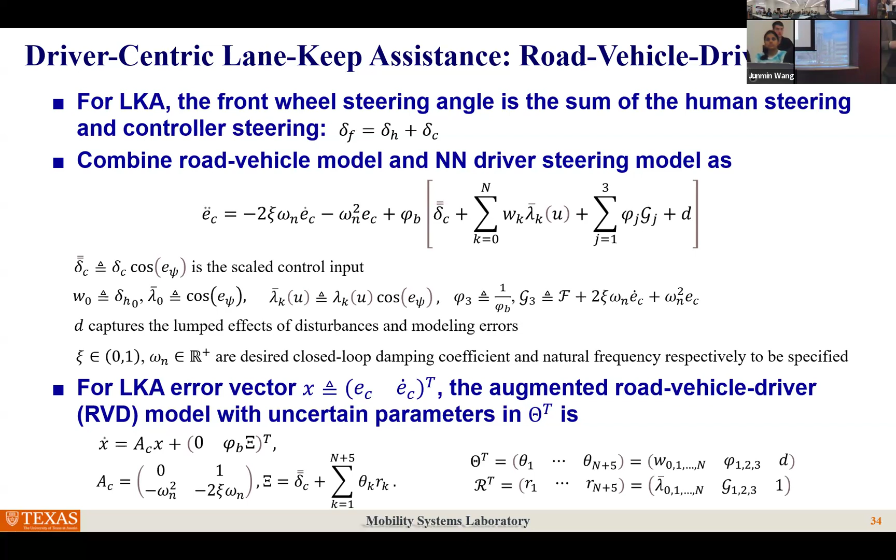So we acknowledge this theta is uncertain, then we put this into this nice adaptive control framework. We are not using the traditional certainty equivalent adaptive control. We actually created this non-certainty equivalent adaptive control. Essentially, we came up with a new approach, a new adaptation, and also use a smooth projection for these unknown parameters, and came up with this Lyapunov function, a little bit different from the equivalence-based adaptive control.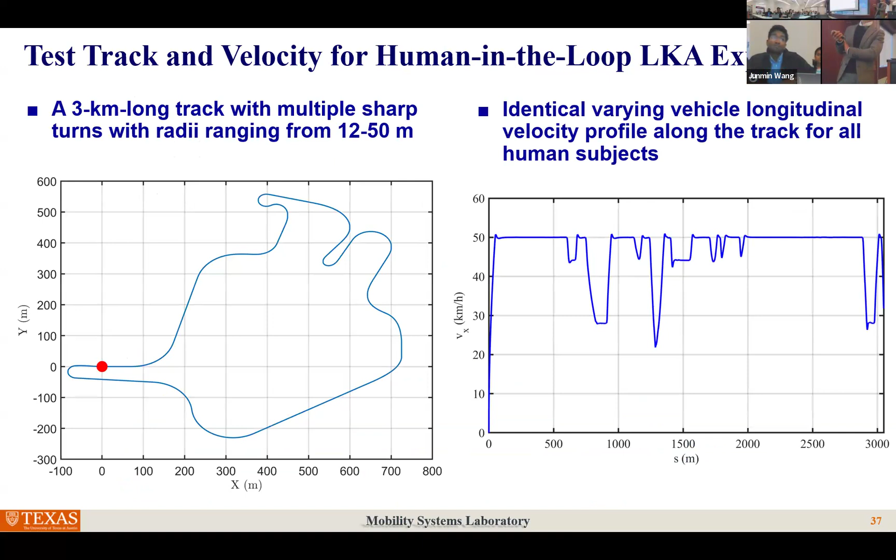And we tested 4 human drivers. This one is showing one of them. You can see this is essentially comparing 3 curves. Red is when the controller is off, solid dark blue is when we're using certainty equivalent adaptive control, and light blue is using our own proposed non-CE adaptive controller. You can see the 3 errors, in terms of EC, lateral displacement error, heading angle error. The light blue is considerably better than the dark blue. Of course, both of them are better than the red.

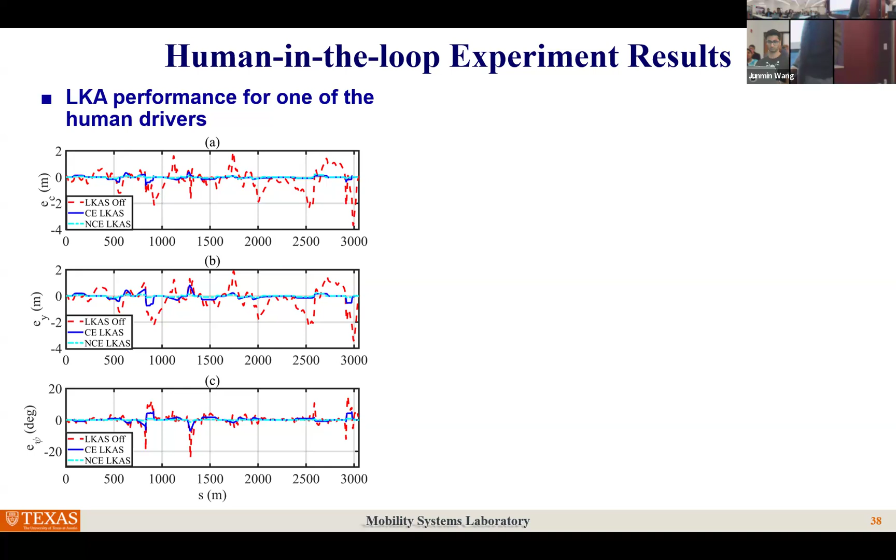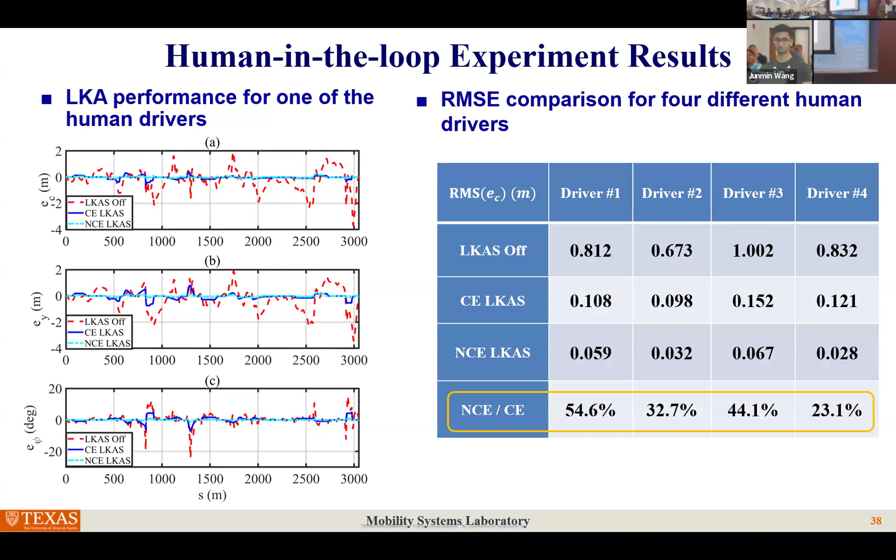Which has no control. Then we quantitatively compare 4 different drivers, number 1 all the way to number 4, and their root mean square error. When the controller is off, this is already a very big number. Then we use the CE adaptive controller, we have much reduction. If we use our NCE, this is the percentage: about 30 to 50% reduction of error by the new adaptive control algorithm.

So in summary, I think we are in a new era, particularly due to communication and computation advancement. I really want to stress that multidisciplinary collaboration is becoming necessary, playing a very vital role in addressing these complex mobility challenges. Bottom line, human acceptance, trust, and adaptability, I think, are the most important things to unlock the potential of all this automation and autonomy technology in real world applications.

So we have additional work ongoing, but I don't have enough published work to form a nice story yet. I hope a couple of years later, I can come back to give you another talk on the other work we have ongoing.

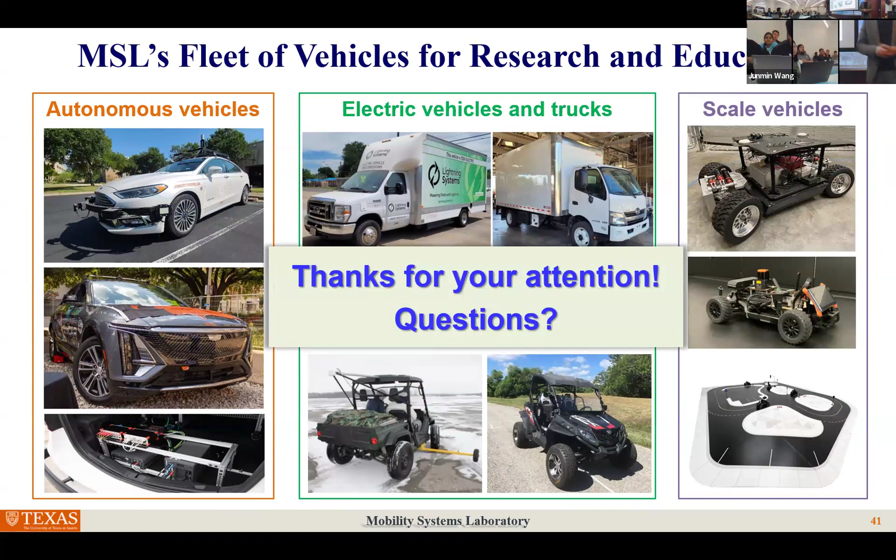Really nice presentation. Thank you. Oh, thank you. Curious about your driver model and the parameters you've identified. Are they stable in the presence of, say, driver fatigue and changes in visibility? Yeah, that's a very good question. So in that paper here, you can see the parameter values here. I can bring up that slide to be more specific.

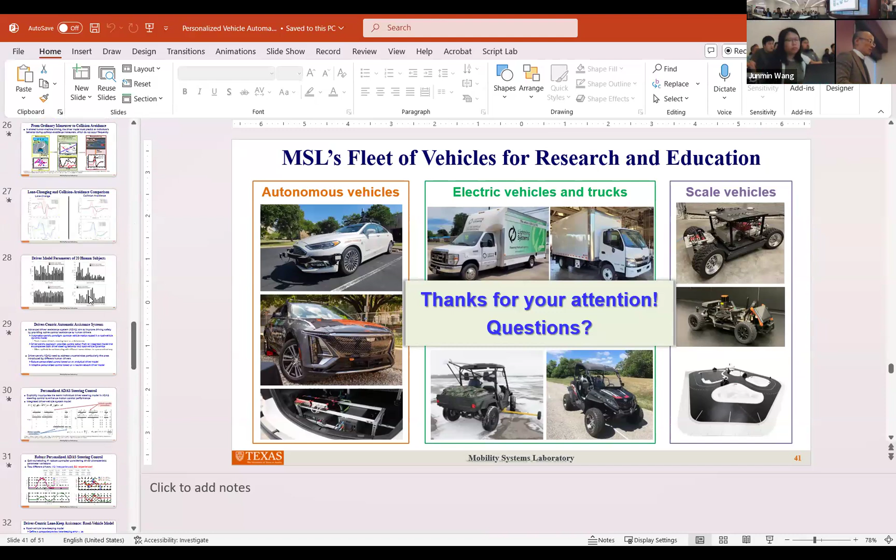The answer is no. The factors you mentioned are very important, and they will affect the driver's parameters, even for the same driver. Fatigue, of course. Even mood. Today I'm late by 10 minutes; that's going to impact how I drive. So that was part of the reason we started leveraging the neural network as a tool to describe that, because this model was in a kind of ideal situation: same conditions, same weather, repeated experiments.

But we can borrow the machine learning tool, then take more factors: weather condition, your calendar, time of the day. All this can be better incorporated. Again, that's part of our ongoing work. We haven't really published that result yet, but that's absolutely a valid point.

Yeah. Akash, yeah. Great.

Yeah, that's a very good question. So I can give you two aspects. One is that this data, driving data, they are available. Like GM has this OnStar for many years. They have the data. Tesla has everybody's. All these are available already. There's nothing technology cannot do. But privacy, whether humans are willing to let somebody use their data, right? That's a big problem.

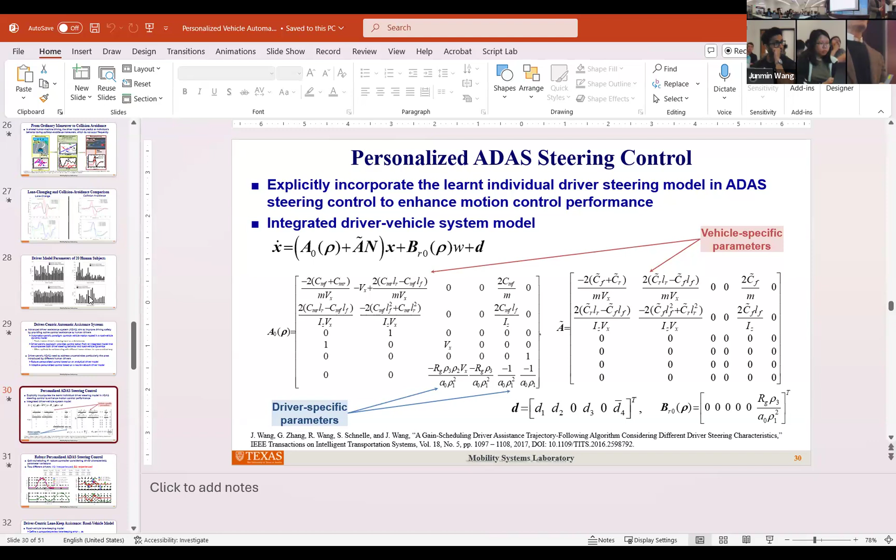Oh, okay. So in this setup, all the human actions are automatically recorded. We have steering angle sensors, pedal angle sensors, vehicle dynamic motion sensors. Those are all captured, recorded, synchronized. The human's behavior data, biometrics data, like brain activity, EEG, gaze motion, can all be synchronized together as well. So using this integrated platform, we can collect the data in an efficient, integrated way. Okay, thank you.

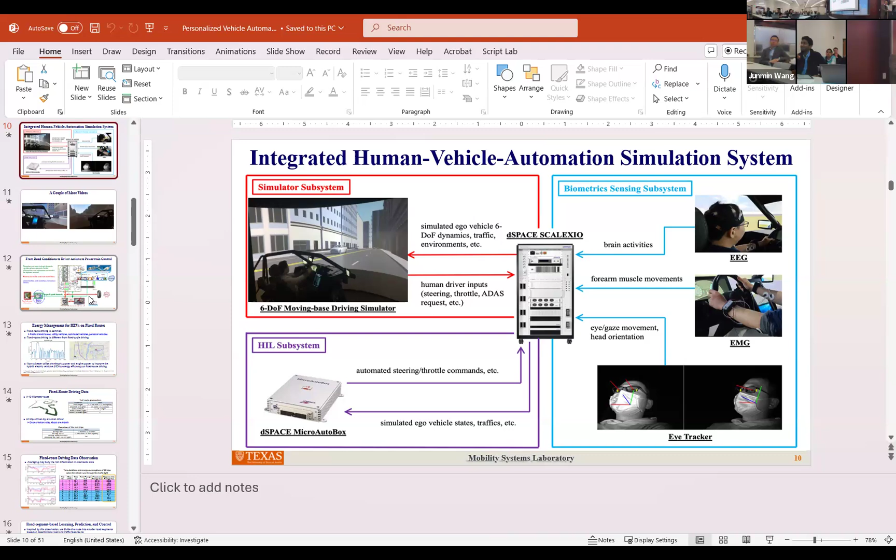I have a question about your controller. Your closed loop responses look really impressive. What was the need to use a nonlinear model and do adaptive control on that rather than using the simple model and designing an adaptive robust control? Oh, you mean the vehicle model, or the human model? Vehicle model. Okay, that's a good question.

So the motivation here was this kind of very challenging course, a racing track, in which the vehicle will be in the nonlinear region in terms of its dynamics. And the human behavior also becomes very complex. It's no longer an ordinary highway. You can see these sharp turns. We want to capture that. Then we kick into the nonlinear region, for tire dynamics almost in saturation. The vehicle body motions become more and more coupled, and square terms and product terms show up. Human behavior also becomes very nonlinear. So we can no longer enjoy the linear model.

So then I would assume that you would need a significantly larger amount of data to identify the model parameters as compared to the simple model, right?

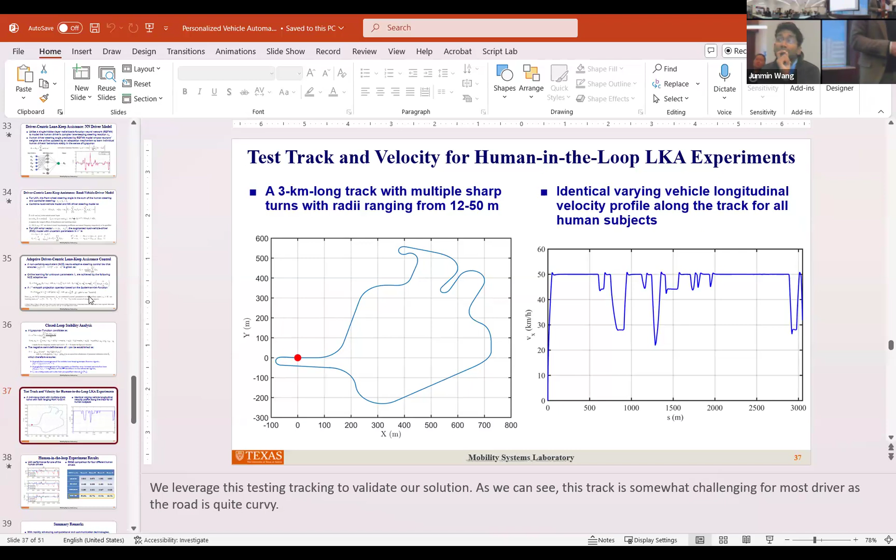When the context of the setup is very different, then the controller may not be sufficient, because in some situations steering may not be a viable solution, and then the steering doesn't work. So what we just showed is that in this limited, confined scope, the benefit is there. Thank you for your comment.

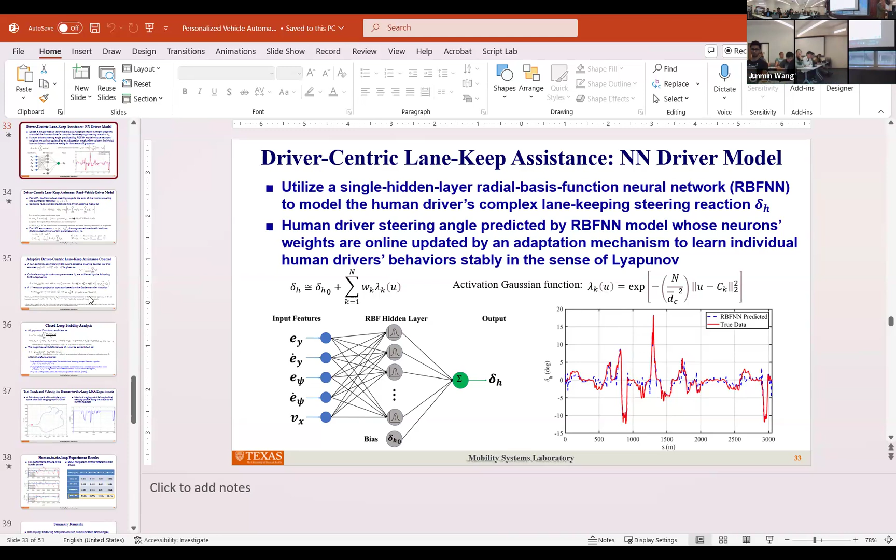I have a question about page 31. Sure. Where you showed with or without control, experienced and inexperienced users show different performance. I'm just curious, for the plots on the right, why do the three different scenarios eventually converge to the same curve? For instance, the red one, the green one, and the dashed blue one. They're from two different drivers. Why do they converge to the same curve? Yeah, this is the double lane change maneuver, right?

So this is yaw rate. When you have lateral motion, you have non-zero yaw rate. But when you come to the straight line, it's already zero. But this one is a failure. The green is a failure. So it has already lost the stability; the car is spinning. That's why it has this non-zero yaw rate and non-zero lateral acceleration, because it's spinning. That makes sense.

Thank you. I have a lot of questions, but I will just ask a general question for the sake of time. You showed all this collaboration with the OEMs in the last slide. Are those OEMs buying this concept of personalization? Do they see a clear pathway to capitalize on this kind of product? Because I was on the OEM side before I joined Purdue. It's all about making money, right? How they can make money out of this kind of feature on their vehicles. Yeah.

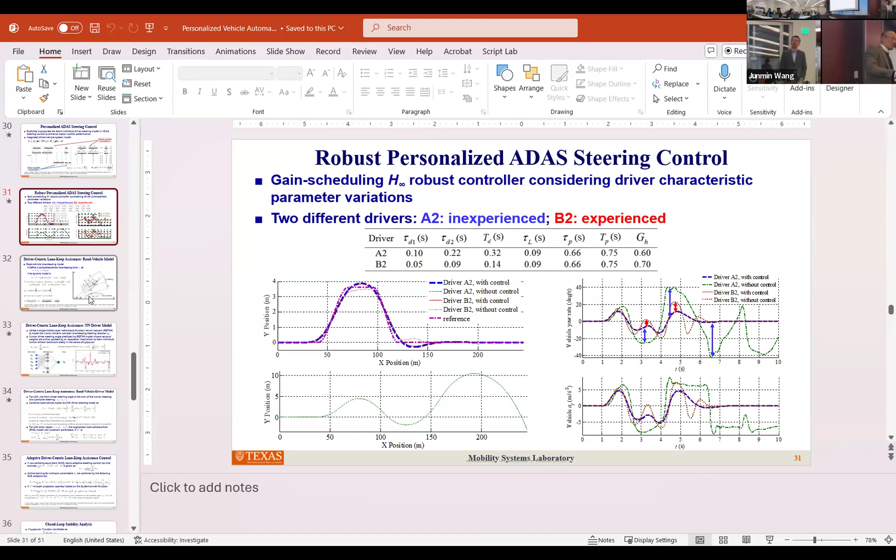You can see these papers were published about 10 years ago. For example, this one was 2017. Once we published these papers, we suddenly realized some OEMs are actually doing similar things, like Tesla. Some customers notice that the pedal behavior of Tesla changes over time with your driving history. We didn't collaborate with Tesla, so whether our work had any relationship with them, we don't know. But at least the industry has some of this personalization.

When I talked with GM, they had a lot of interest, and they are also doing personalization in different ways. In January, I was at CES in Las Vegas, the consumer electronics show. I noticed a lot of automotive companies frequently showing the keyword personalization on their display boards. So it's becoming a trend because we have data, we have the computational power, and customers have demands.

As I said, it's a machine I bought, I paid money, and the machine needs to serve me, not you. Or you bought it, it serves you, not me. So it's a need. Like your computer, like your cell phone, you have some space to change. So I think the same is here.